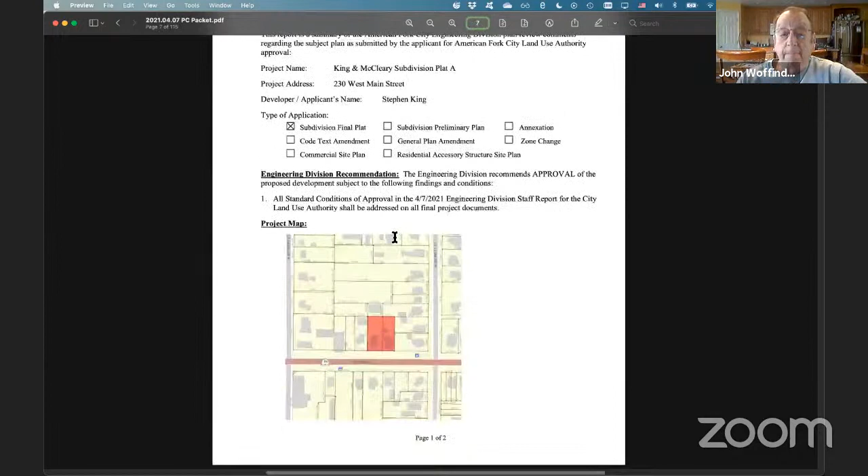Adam, would you lead us in this one, please? Yes, thank you Chairman. This first item is the final plat for King and McCleary. This may look familiar because we did see the site plan a few weeks ago. This is just a subdivision plat which formally divides the properties. Actually, there were two properties to begin with. This basically shifts the lot line to go right down the center of the drive aisle between the two properties and the two structures, so each lot is approximately a quarter acre. While the site plan did indicate there's a shared access, and I believe there's been a document recorded to such effect, just as an extra measure of precaution, I'd recommend a plat note be added that also notices this shared access between the two properties. With that, planning would recommend approval.

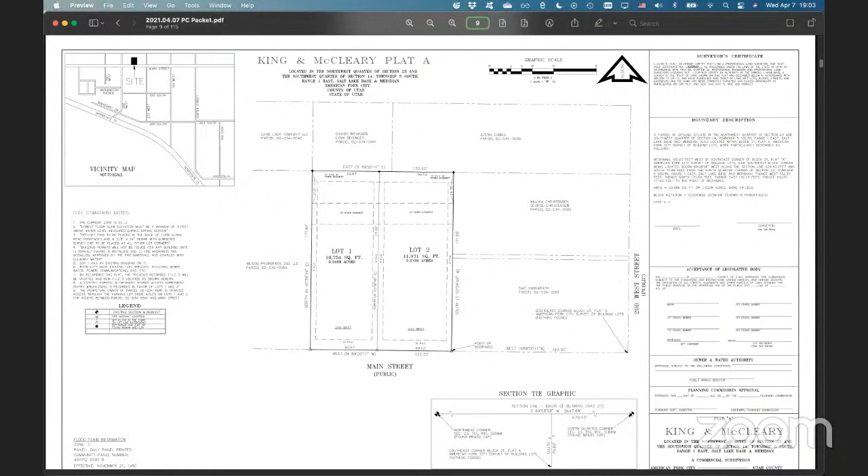Let me double check on that. City standard notes, yes, okay. You're right, Harold, okay so strike that. That is there, so that was something I somehow overlooked, but you're correct, it is there. We talked about that when they brought it before us last time, and I think they pointed that out.

Good catch, Harold. Jeff, does engineering have any concerns with this project? No concerns from engineering, recommend approval. Any questions for engineering from the commissioners?

This does require a public hearing. Have we had any public hearing comments turned in on this one, Adam? Not that I'm aware of, no. All right, so we'll open and close the public hearing since there are no comments to be made.

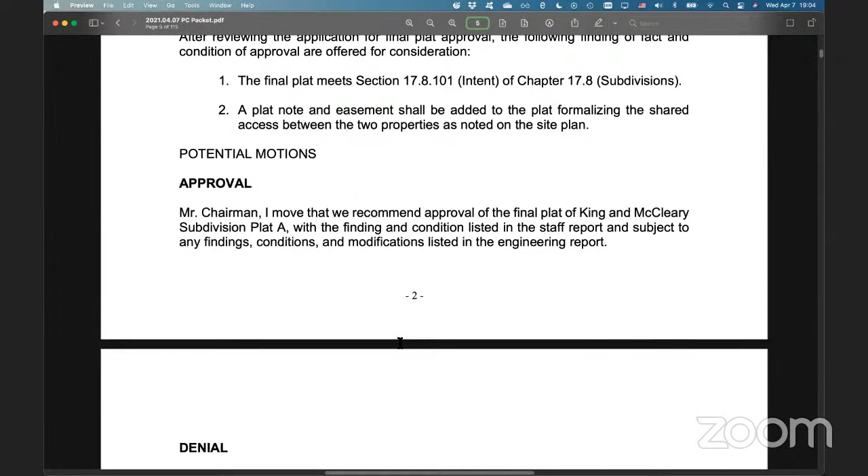I would like to entertain a motion from someone, please. Mr. Chairman, this is Harold. I move that we recommend approval of the final plat of King and McCleary subdivision Plat A with the findings and conditions listed in the staff report, subject to any findings, conditions, and modifications listed in the engineering report. Thank you, we have a motion from Harold, do I have a second? This is Ryan for second. I have a second from Ryan.

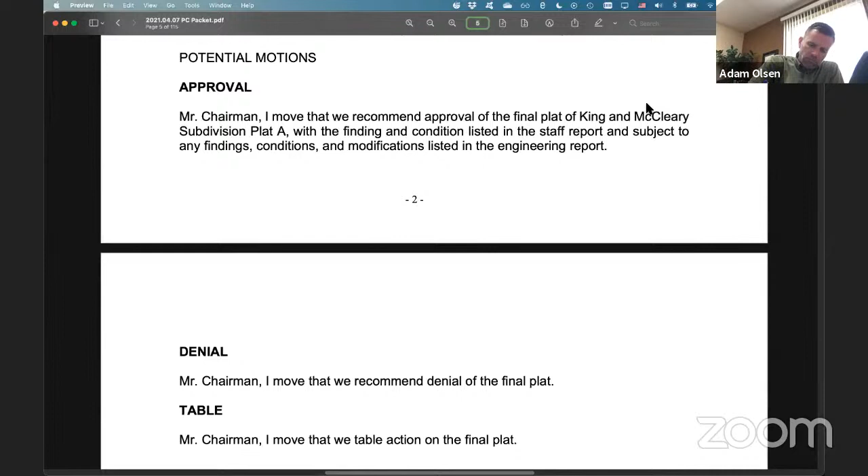Any further comments on this project? If not, we'll take a roll call vote. Christine? Aye. Is Chris here? I don't believe so, no, not yet. Ryan? Aye. Harold? Aye. Jeff? Aye. Chairman votes aye also. So it's 5-0, motion passes.

Moving on. Hearing, review, and action on the preliminary and final plat for Mitchell Farms Plat D, located in the vicinity of 730 North, 860 West, in the R1 12,000 zone.

Adam? Thank you, Chairman, just a quick update. Chris will likely not be joining us, he did send an email earlier. He was going to try to log on, but his service was really spotty, and so he didn't know if it would be successful. So if he's not with us, that's why.

Okay, but I'll go ahead and introduce this next item. This is Mitchell Farms Plat D. This is basically at the southwest corner of the subdivision, at the intersection of 700 North and 900 West, the northeast portion of that intersection. This just kind of fills in that area. The only reason there's a preliminary plat before you is because the original expired, but this is the same as what was approved a few years ago, I believe in 2017. It's just another phase of the subdivision. All the lots exceed the minimum requirements for the zone, and we'd recommend approval.

Any idea when they'll be taking the apple barn and the other buildings down that's on that corner piece of property? I don't know, no. Kind of sad to see them go, but that's progress.

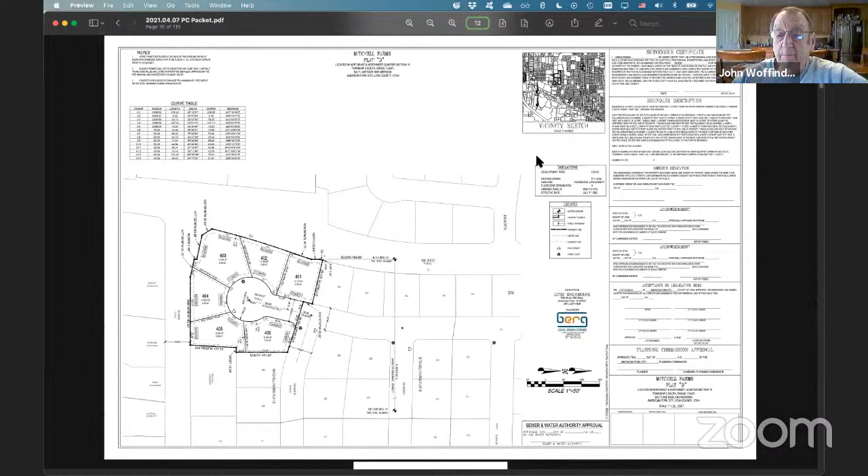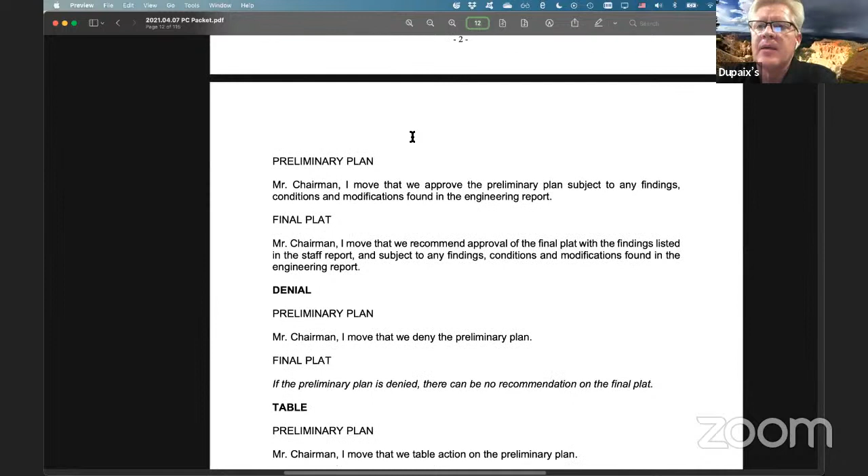Mr. Chairman, this is Jeff. I move that we recommend approval of the final plat with the findings listed in the staff report and subject to any findings, conditions, and modifications found in the engineering report. We have a motion from Jeff. Do I have a second? Second, Harold.

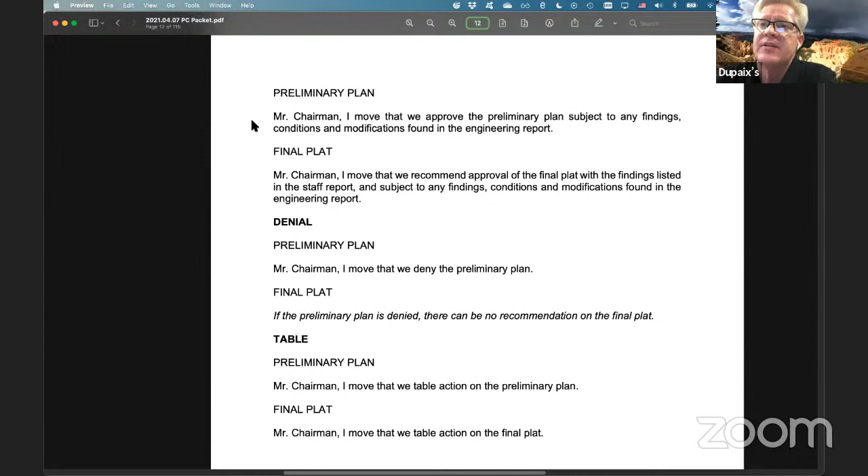Oh, that was the final plat. So actually I need to do the preliminary plan first, right? Preliminary and final both. Okay, so I need to state both motions. For the preliminary plan, Mr. Chairman, I move that we approve the preliminary plan subject to any findings, conditions, and modifications found in the engineering report. Harold, are you still on board for that one?

Second. All right. Do I need to roll call or restate the final plat? Has the vote been made on the preliminary? Not yet, no. It's just been seconded. Once that one is done, yeah.

Okay. Christine, aye. Ryan, aye. Harold, aye. Jeff, aye. Chairman votes aye also, 5-0 on that one.

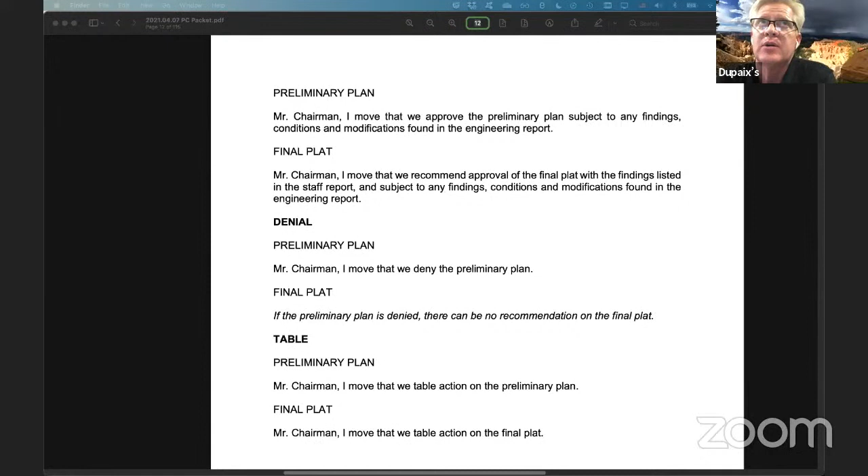All right, now we'll do the final plat. Mr. Chairman, I move that we recommend approval of the final plat with the findings listed in the staff report and subject to any findings, conditions, and modifications found in the engineering report. Thank you, I have a motion from Jeff. Do I have a second? Second, Harold.

Any further comments on the final plat? If not, we'll go with the roll call vote. Christine, aye. Ryan, aye. Harold, aye. Jeff, aye. Chairman votes aye also, it passes again.

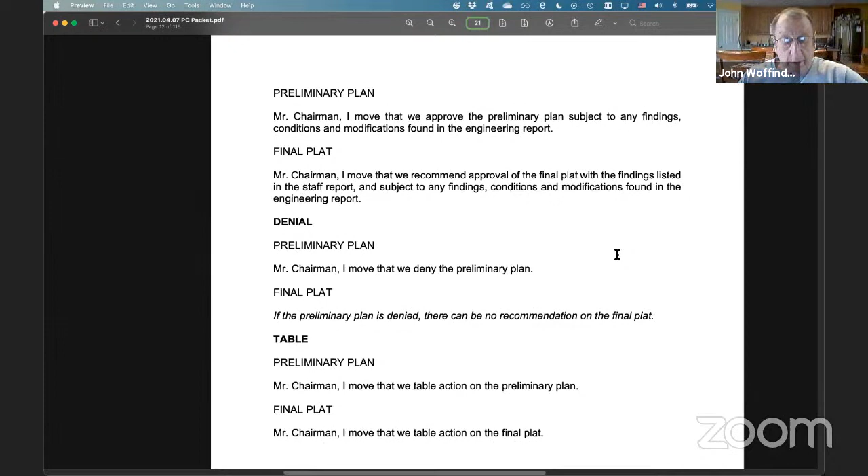5-0. Okay, moving along. Review and action on the final plat for Rockwell Ranch, Block 5, Phase 2, located in the area of 620 South, 1100 West in the TOD zone.

Thank you, Chairman. This is a fairly straightforward item. This is a final plat for Rockwell Ranch, Block 5, Phase 2. What this does is it adds a common area to the overall development. This was inadvertently left out of previous plats, and it's just a cleanup item to formalize that and include it in a plat. So this is intended as open space, common area to be owned and maintained by the overall HOA for Rockwell Ranch.

Basically a housekeeping item, right? Yes. All right, any comments or concerns from planning commissioners on this one for Adam?

All right, this does not require a hearing, so we'll take a roll call vote. Oh, we need a motion first, I guess. Someone need a motion on this one, please.

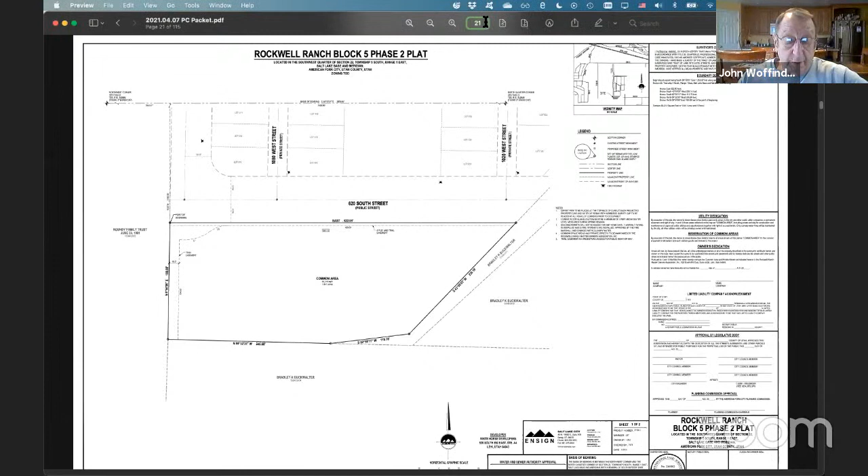I have a question, I guess. If this will kind of be used as water retention, but also as a play area, is that right? It will be, I believe it will be landscaped as open space. I don't know that it will have playground equipment in it, but it's not just going to be left natural, it will be improved.

I'm just wondering if crosswalk painting would be helpful if people from residential areas will be using it much. It's hard to tell the scale, maybe it's not as big as what I'm imagining, but that's just a consideration. What, a crosswalk across 620 South, Christine? Yes. It's nearly 2 acres, so it's about the same size as Martin Park out here behind my home.

I feel like when we have open space that would be used as a gathering or play area, a crosswalk's a good idea just for families and children. That's just a thought.

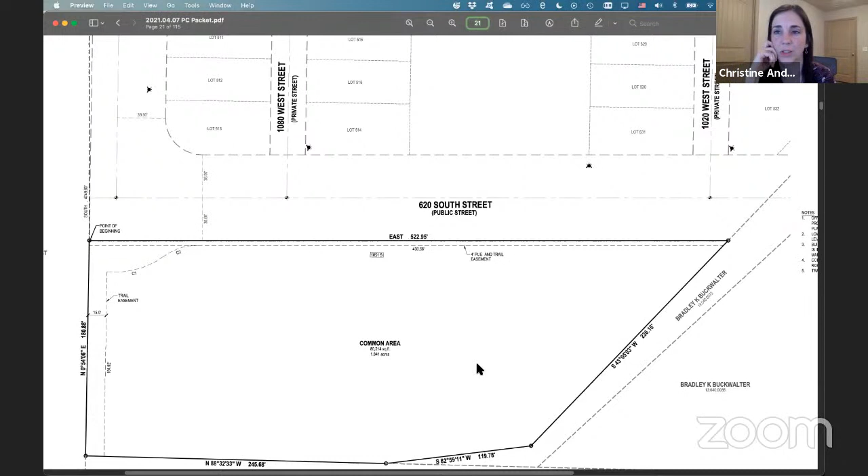Well, I can support that because we have a similar issue with Hunter Park by my house. It's a very popular park, and the crosswalk went in once the park was built, but then we added a rectangular rapid flashing beacon to enhance safety. If we go that direction, which I support, we would need to add that amenity as well, because it brings enough attention that kids or people crossing to go to the park will make drivers slow down.

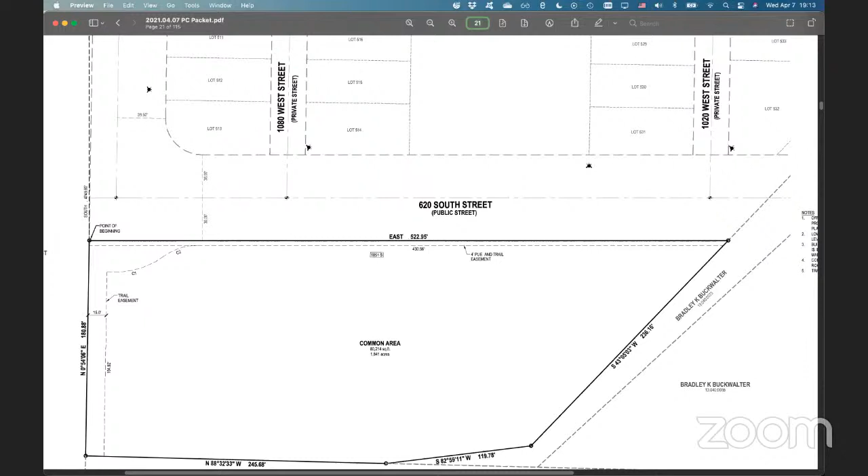This is Tana from engineering. I put up the plans for the development just to the north, and they actually do show a crosswalk going across at 1100 and 620 South. So I would strongly suggest that we put in the RRFB with it.

I know there's a crosswalk at the north end of Martin Park that was painted when they redid 7th North last fall, and it gets used quite a bit by kids coming down to the park. So it's a good idea to have a crosswalk for sure.

Any other comments or concerns?

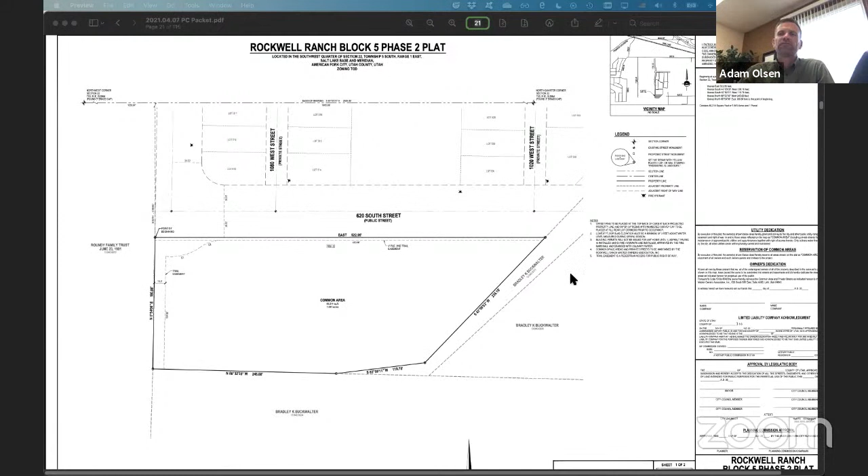Adam, we can't necessarily put that crosswalk in the motion, can we? It's shown on the plans already. It's for improvements. All right, let's have a motion on the Rockwell Ranch Block 5 Phase 2, please, then, from someone.

Do we want to hear—does this require a hearing? No, okay, this is just review and action on this one.

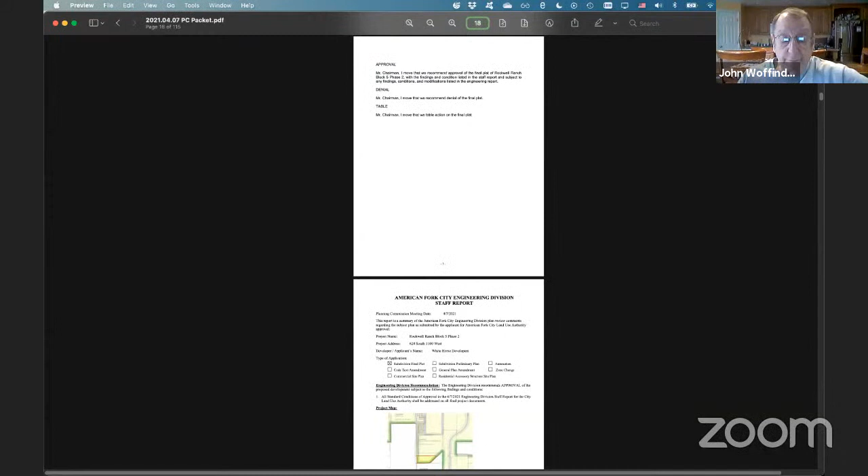I would just like to hear engineering's opinion on putting in a system like that with the crosswalk. We can look at it and see—sorry, this is Rebecca Andrus, city engineer. We can look at it and see if it warrants.

We want to be careful using those in specific areas, because if you have them everywhere, they begin to become white noise. So we want to focus on having them on high intensity crosswalks in areas like schools. I understand that.

At the same time, 620 South is a busy road and will become busier as the rest of that area develops, so I strongly encourage you to take that under consideration. Yes, we can definitely look into that. And like I said, we can see if it warrants it.

Do you think, Jeff, that it'd be as busy as 700 North eventually? Potentially, especially if things get punched through across the North County. There's a lot of traffic at 700 North, but there's no warning signal, just a crosswalk. But it is used quite heavily by the neighborhood to the north of the park. Safety is a big issue, there's no doubt about that.

All right, need a motion on the Rockwell Ranch Block 5 Phase 2, please, from someone. This is Jeff, Mr. Chairman. I move that we recommend approval of the final plat of Rockwell Ranch Block 5 Phase 2 with the findings and conditions listed in the staff report, and subject to any findings, conditions, and modifications listed in the engineering report.

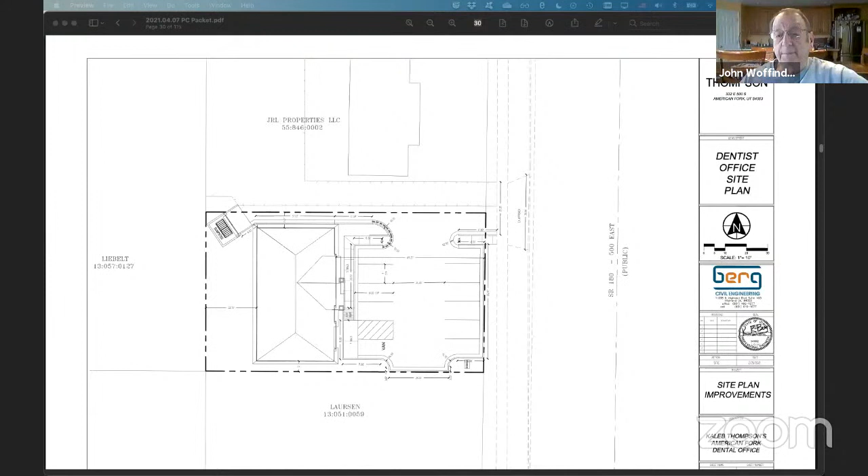Any other comments? Engineering, any concerns on this particular project? No comments or concerns from engineering, and recommends approval. All right, thank you. Any comments or concerns from the commissioners to engineering on this project?

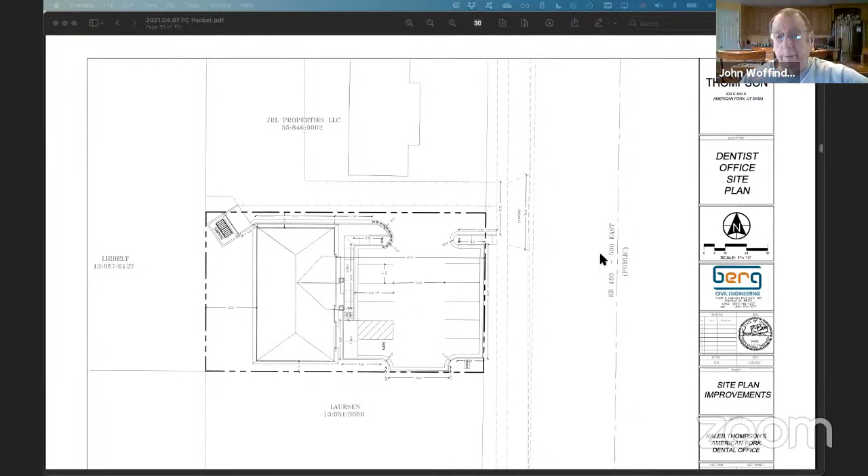Hearing none, this one requires a public hearing. Adam, any public hearing on this one? No, we've not received any comments on this one. All right, we'll go ahead and close the public hearing process then.

Need a motion on this one for KT Dental, please. Mr. Chairman, this is Harold. I move that we recommend approval of the site plan for KT Dental.

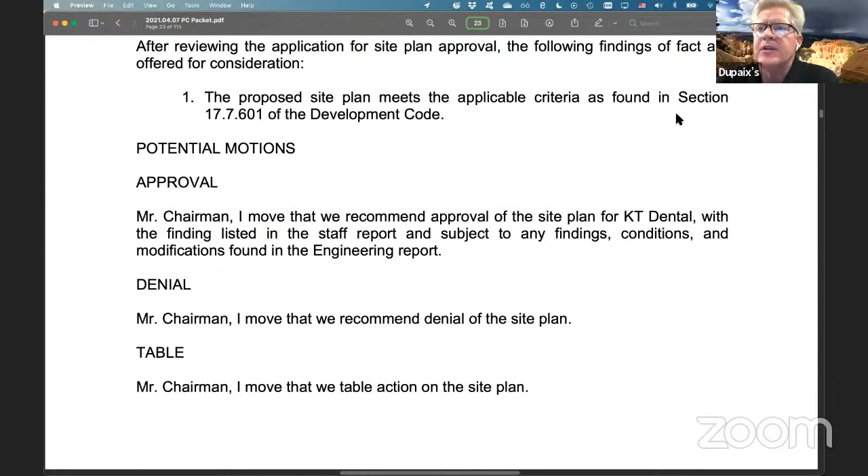Did we lose Harold? Harold, you're muted. Oh sorry, I was trying to move something so I could read the whole approval.

Mr. Chairman, I move that we recommend approval of the site plan for KT Dental with the findings listed in the staff report and subject to any findings, conditions, or modifications found in the engineering report.

All right, thank you. We have a motion from Harold. Do I have a second? Second from Jeff. Any further comments or concerns on this one?

Chairman Woffinden, this is Ken Berg. Oh hello, Mr. Ken, how are you? Fair to Midland, I didn't know you were there. Sorry about that. That's fine, you guys are on a roll.

Before this, we needed you guys to give your recommendation on using the existing 500 East right-of-way that has an oversized planter to meet our parking requirement. I don't know if that's listed in your reports. If it is, that's great. I just didn't want to go to city council without your recommendation on that.

Adam, what's the status on that planter? I didn't have any issue with that, so I didn't bring it up. Do we need to add that to the site plan? I don't believe it needs to be added. If there's any question later, I can address that, but I don't believe so.

Okay, that satisfy you, Ken? Of course, thank you, you're good to work with, young man. We put up with engineers all the time.

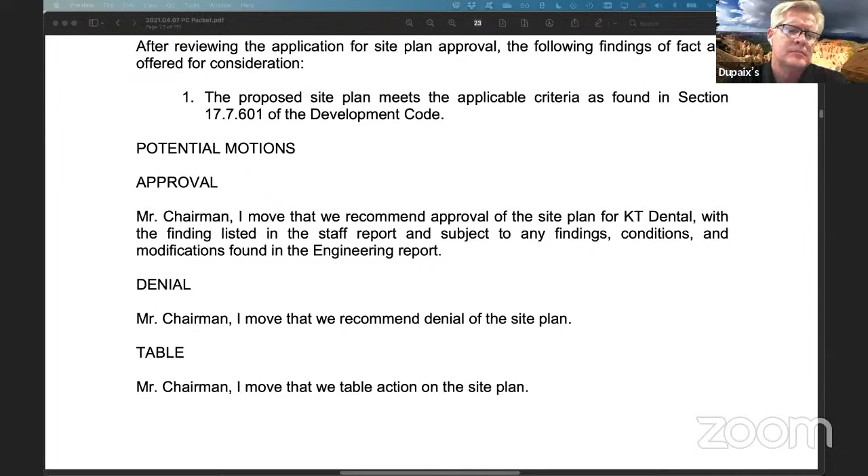Christine, aye. Ryan, aye. Harold, aye. Jeff, aye. Chairman votes aye also. It passes 5-0.

Thank you, sorry for not noticing you, Ken. Next time? No, you're on a roll, I don't ever want to stop when you guys are doing your job. So keep up the good work. You don't want to stick around till 1 o'clock in the morning? It used to be fun. No, I'll leave those for you guys. Yeah, smart man, smart man.

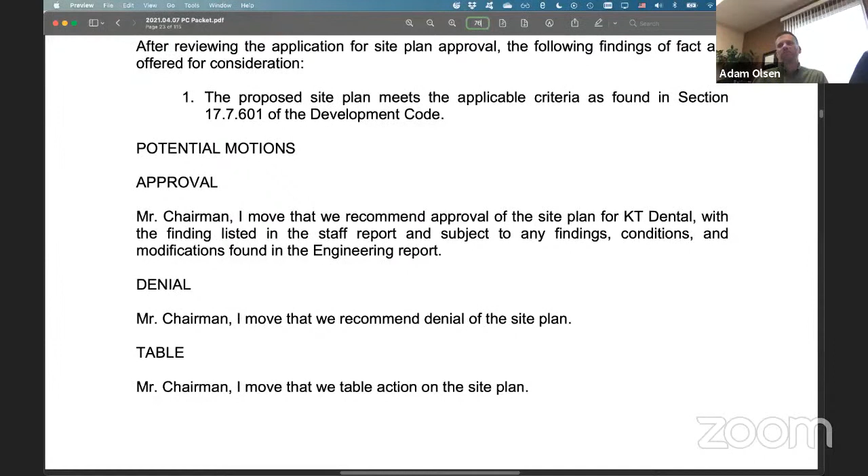And then does this one move on to city council or do we end with you guys? This one goes on to council. Okay, all right, thank you much. Thank you, Ken, bye.

Okay, these next two we'll discuss together. We'll hold separate hearings and separate motions and separate votes. Number 5, hearing, review, and action on the land use map amendment located at 717 West Main Street from the major transportation facility to the design commercial designation. We'll go ahead and discuss the land use map first, then we'll go into the zone map amendment second.

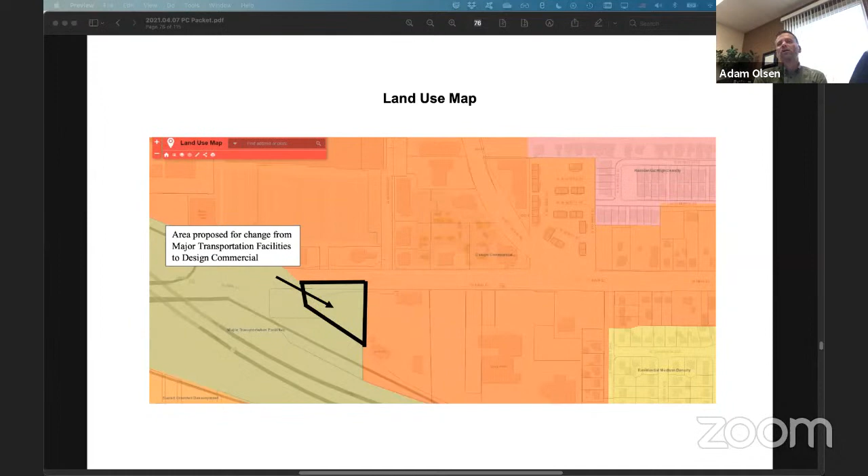Adam: Thank you, Mr. Chairman. As you stated, these can be discussed together. There are 2 motions in your report. So just a little bit of background: when UDOT came through and rebuilt or expanded I-15 a number of years ago, as well as Pioneer Crossing, this was part of the old Harts property, I believe, and it was obtained for that expansion purpose.

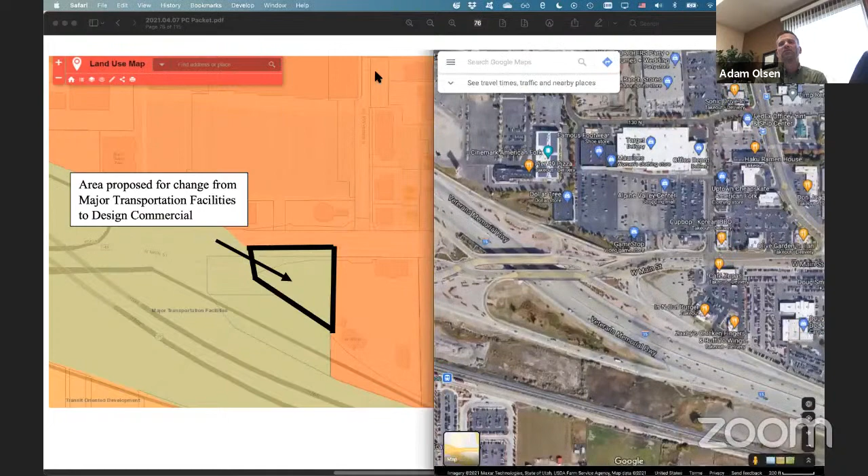It's no longer needed. The adjacent developer is purchasing that and would like to construct a site plan on this. But in order to do so, the underlying land use classification and zone map needed to be amended from transportation facilities to design commercial and then the SC1 zone as well. You can see on the aerial being pulled up, it's basically just west of the Zupas and In-N-Out area, the leftover unimproved portion. This will be finished out.

As part of the site plan we're actually reviewing in anticipation of this zone change, it does reroute quite extensively the In-N-Out drive-through. I know that was of concern at the last meeting, and so that is being addressed with the site plan being reviewed for this area. So with that, staff would recommend approval of both the land use and the zone map amendment.

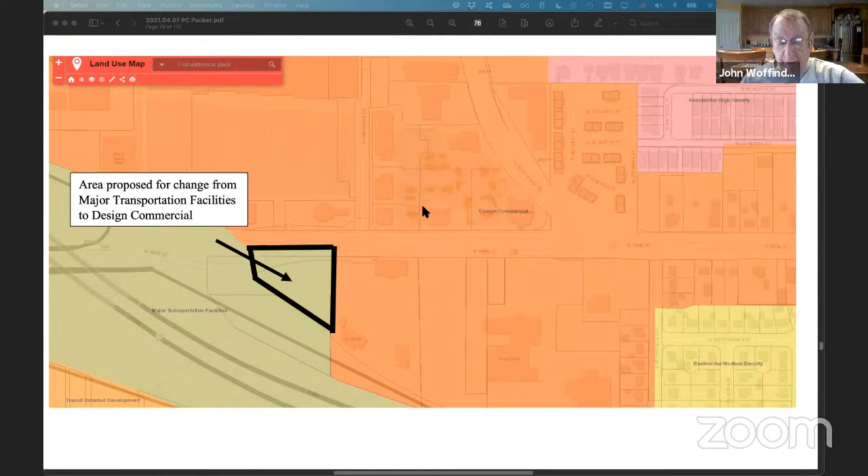All right, thank you. Engineer, any comments on this project? No comments from engineering. All right, thank you. Have we had any public comments on either the land use or the zone map amendments, Adam? No. All right, we'll go ahead and open those 2 hearings. We'll go ahead and close those 2 hearings, no comments received. We need a motion first on the land use map amendment, please, from someone.

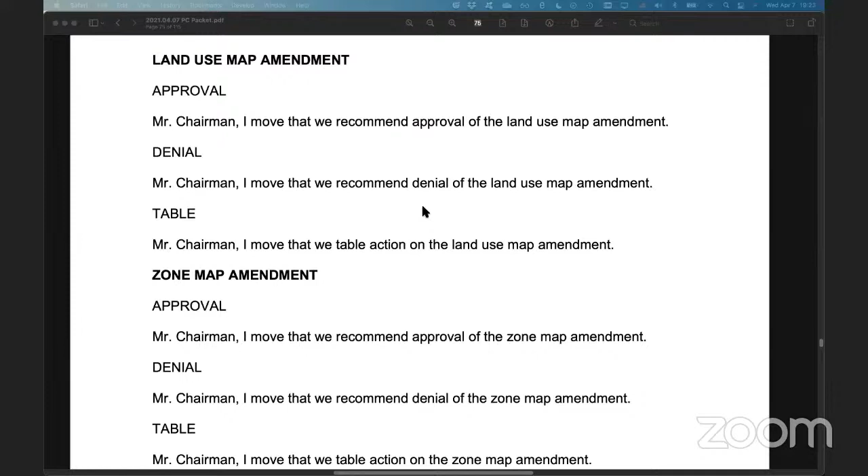Chair, this is Ryan. I move that we recommend approval of the land use map amendment. All right, I have a motion from Ryan. Do I have a second? Jeff, second. Have a second from Jeff. All right, thank you.

Christine, voting on this one please. Aye. Ryan, aye. Harold, aye. Jeff, aye. Chairman votes aye also. It passes 5-0. Okay, now we need a motion on the zone map amendment, please, from someone.

Mr. Chair, this is Ryan again. I move that we recommend approval of the zone map amendment. All right, I have a motion from Ryan. Do I have a second? Second, Jeff. All right, thank you.

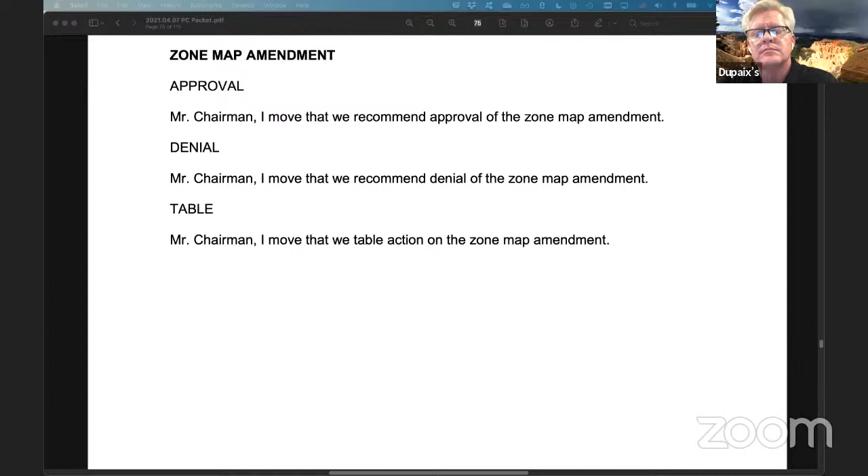Christine, voting on this one please. Aye. Ryan, aye. Harold, aye. Jeff, aye. Chairman votes aye also. It passes 5-0.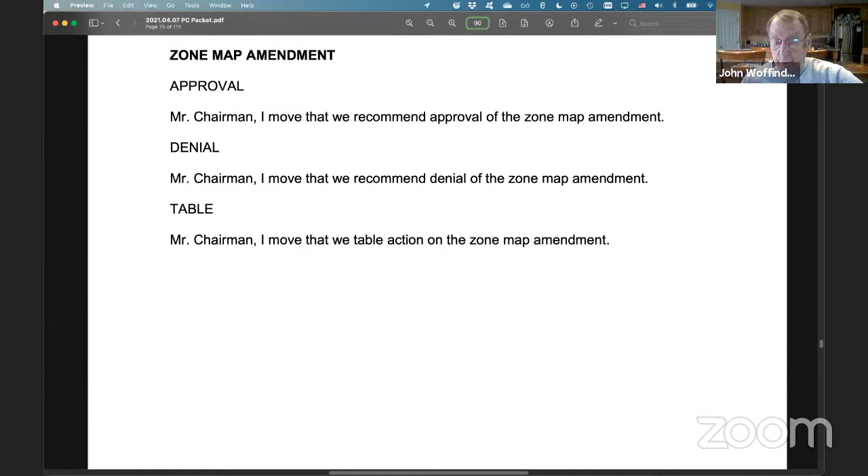Okay, we're down to number 7: hearing, review, and action on an amendment to the Lake City Row Planned Community Master Plan, located in the vicinity of 860 East Utah Valley Drive, in the PC Planned Community and the PI1 Planned Industrial zones.

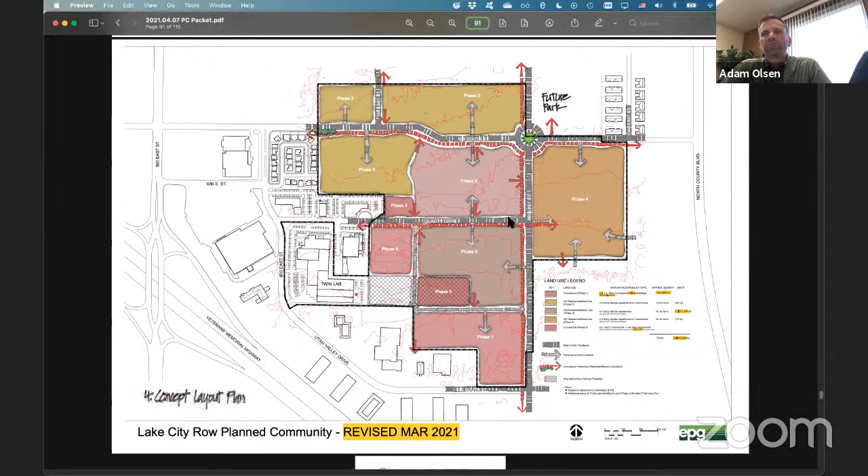Thank you, Chairman. This area was annexed under the Vest annexation, most of it in 2019, and the majority of the property was zoned PC, or Planned Community. This was done in anticipation of mixed use development consisting of office space, retail, and higher density residential. In addition to the annexation, a master plan was approved for the area in November of that same year, 2019.

The master plan itself, which is what's before you on the screen, envisioned up to a potential of 2,500 residential units. Within those residential units there were also areas of commercial, such as office and retail, amongst the higher density. Also with the master plan, the applicants were granted a reduced parking ratio of 1.8 stalls per unit.

This was done under the premise that a large area of shared parking would be present between the office commercial and the high density residential, to offset the peak demands of residential and office use.

You can see this area called out as a crosshatched area on the plan, at the southwest corner of phase 3 and north of phase 1. It's labeled as phase 5, with a general crosshatched area to the west. So the applicants have come with a proposed change to this master plan.

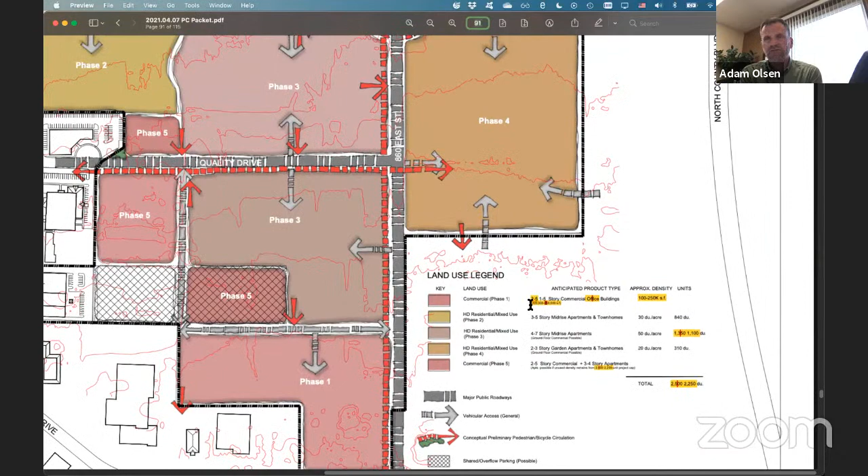The change alters the commercial in phase 1 by removing the office designation and also removing the 2 to 5 story designation from the anticipated product type. In its place, what they propose is a 1 to 5 story, general commercial building type, intended for office warehouse.

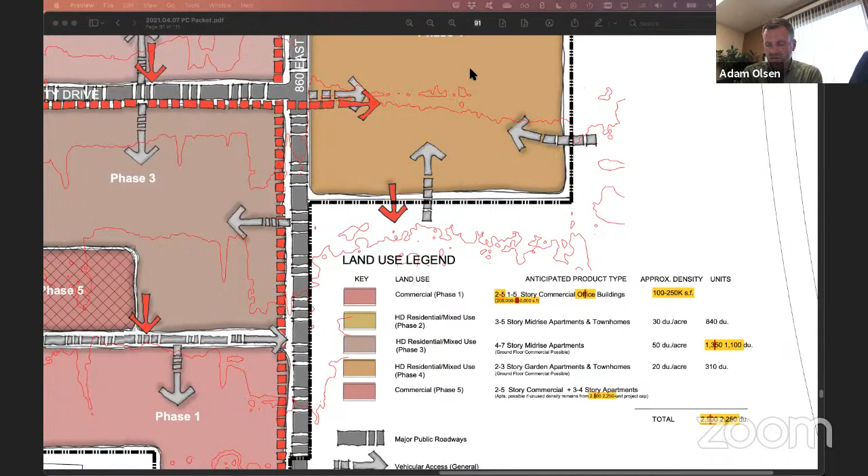Planning staff recommends against the proposed change. The original master plan, as approved, provided up to 2,500 residential units on the premise that this would be a true mixed use development.

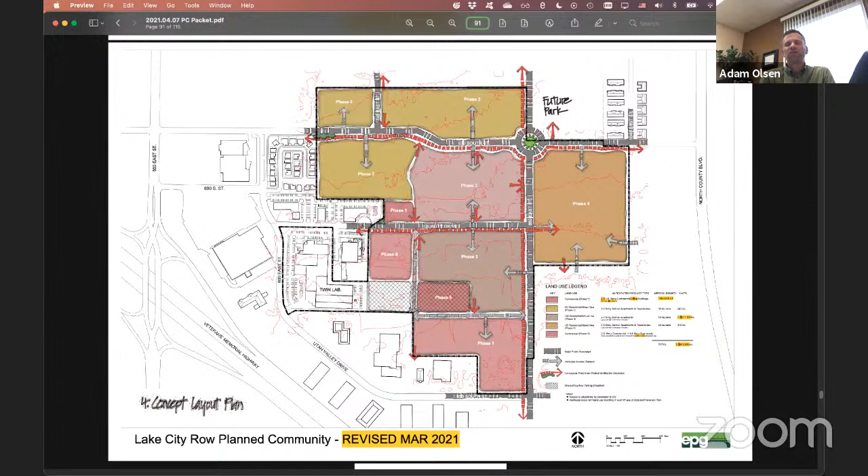Office warehouse developments are typically found in largely industrial or light industrial areas, not within traditional higher density mixed use commercial developments. The office component of a mixed use development, along with more traditional retail, helps create that mixed use environment which is conducive for walkability, and allows residents to conveniently access both workspaces and more traditional retail uses.

Additionally, as I stated, the parking requirements for this area were reduced from the city standard of 2.25 stalls per unit down to 1.8.

This was done on the premise that there would be approximately 1,500 commercial or office spaces used for this shared parking, coming out of phase 1, which is what they're looking to change tonight. Office warehouse uses have a greatly reduced parking requirement, with the warehouse portions only requiring 1 space per 1,000 square feet.

So while the applicant does propose, in their written narrative, a reduction of the overall residential units by about 250 units, the area where this reduction would occur is in phase 3, north of, I believe, Quality Drive.

Phase 3, adjacent to phase 1 and adjacent to the shared parking space, has already been approved for over 500 residential units at that reduced space. If office warehouse uses go into phase 1, it will further reduce the amount of shared parking available for those 2 uses, which was one of the premises of the reduced parking standard granted with the original master plan.

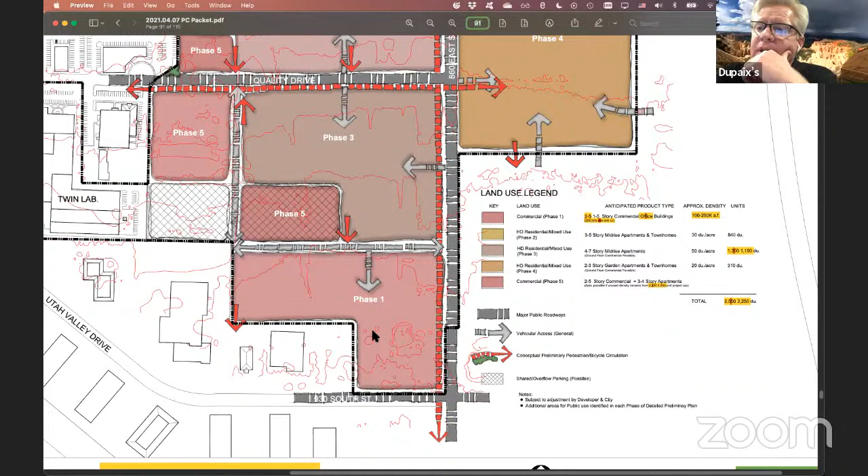So my question to you, Adam, is you have what's currently labeled Twin Lab, which is Built Bar, and then you've got Thermal Works down there in the same area. How are those classified? Their uses are somewhat industrial. Yes, but those are pre-existing, and when a lot of this area annexed, it was annexed under the premise that this would be converted into more of a mixed use, true mixed use development with more traditional retail office components, and then the higher density residential mixed in as well.

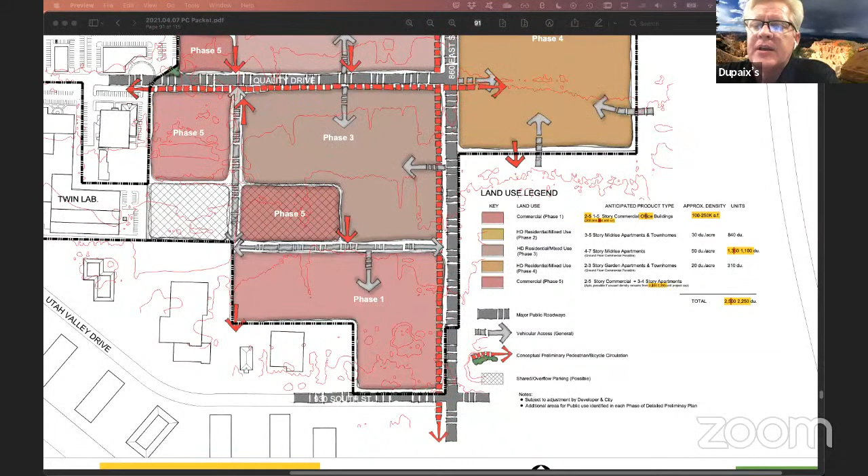So phase 3, that was approved a few months ago, I believe it's the Ritchie project, and it was a little over 500 units approved in that phase. But again, when the original master plan went before the council, the crosshatched area was intended for a shared parking area between the office use and the residential use, with those peaks being offset. I'm just trying to understand, trying to look at where staff is and trying to think of where the developer could be, because looking at the other uses, I can understand why they may want to go that direction.

Yeah, and I have to agree with Adam. I think we shouldn't be changing the master plan, because putting office warehouses in here kind of defeats the idea of a mixed use, and it shoots the walkability down for those residents who would want to walk around and go from store to office or whatever it may be, because they're not going to want to go to an office warehouse. And with an office warehouse, you're going to have a lot of truck traffic coming and going. It's going to be awful noisy for people living there if they put office warehouses in. So I agree wholeheartedly with Adam that I don't think this amendment should go through and change the master plan.

Anybody else have any concerns? I have a comment. I remember recommending approval for this area, and I'm pretty excited about it. It's a great chance for a true mixed use, like Adam was saying, and I really feel it's important to keep it the way we originally approved it.

We allowed them to have a higher density with the understanding that there would be that shared parking, and that it would be mixed use. The higher density was also given with the understanding that the extra parking needed from the higher density would be covered by phase 5. For a true mixed use development to work, it really needs that office commercial use to allow for walkability and local livability, workability, all those things that make a mixed use area work. So if you turn this into office warehouse, not only do you have the truck traffic and the noise and the undesirableness of living next to a warehouse, we'd be allowing the higher density without the amenities of a mixed use area.

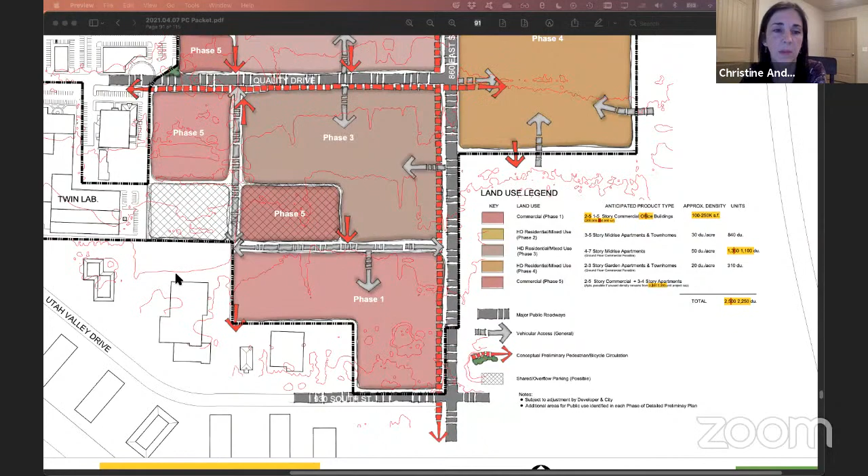So I feel like it's really important that it stays a true mixed use area, even if it means postponing some of the development until the market is ready for it.

I agree. Mr. Chairman, if it's possible, I would like a chance to respond to the concerns before the commission deliberates, because that might help the deliberation. Well, I was going to bring you in, but now that you're here, go ahead and we'll give you a couple of minutes to tell us about your project and why you think it's necessary to go against the master plan that we've already approved.

Okay, you've got it. And I just want to start by showing appreciation. State your name for the record, please. Yes, my name is Buck Swaney. I'm with Millennial Development Partners, or MDP Land, and we're the proponent of the master plan.

Thank you. I do want to keep this discussion simple and direct. An important thing to note is that we've been delivering less residential density, and this adjustment that we're requesting would also deliver less commercial intensity.

The LCR Lake City Row plan progress, we have a history of delivery. We've delivered $3 million of right-of-way, about $6 million of roads and utilities that are nearing completion right now. The utilities are paid for and sized for 2,500 units.

We maintain a good faith obligation to the city and our partners to roll with commercial development because it's part of our core commitments. Now, as COVID happened, we experienced pretty unbelievable disruption to office economics, like nothing that the American economy has really ever seen before.

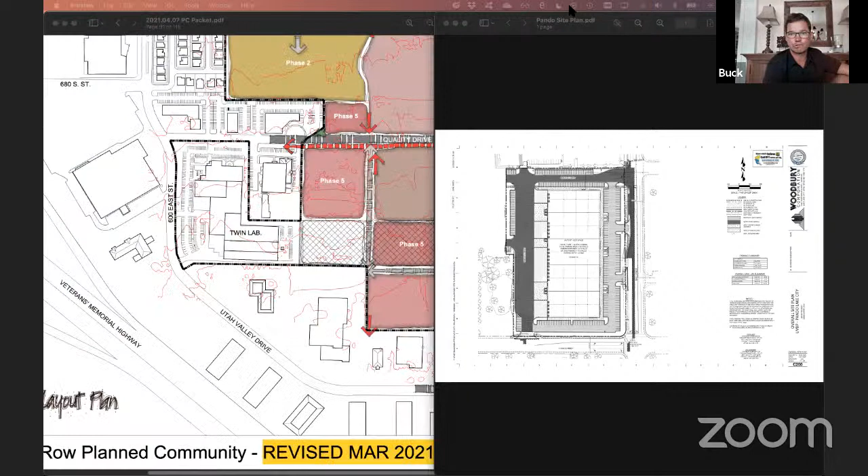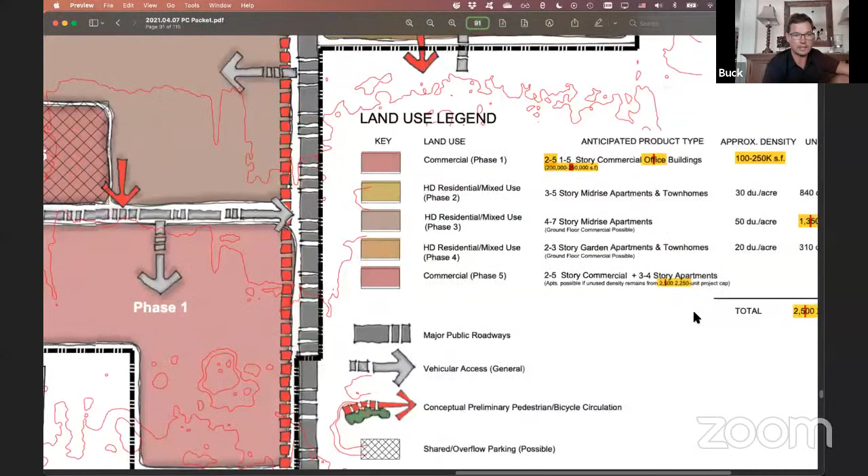The first is that in the master plan — Vendeline, if you could go back to the phasing sheet of the master plan. There you go. If you look over in the key at the right, you'll see the third color down has the high density phase 3 stuff. I think that's not the phasing plan — that's the concept plan, correct? There we go, all right.

You see that in phase 3, it shows maximum density, 120 dwelling units per acre. If you zoom out a little so we can see the Aspen Meadows property where this phase 3 is, the non-hatched phase 3, that's the area where we had targeted up to 120 dwelling units per acre of density. But on the next sheet, we saw a more likely outcome of 50 dwelling units per acre. We actually landed at 34 dwelling units per acre on this 15-acre part of the site.

So the parking need is much less dramatic — it's a much smaller take on parking. Instead of the intended 754 units we allocated based on 50 dwelling units per acre, the site's final design only contained 512 units. Our proposed 250 unit reduction actually comes from this area — it was drawn from this area, not the phase 3 area to the north. So the practicalities of developing this site packed much less demand for parking right around the phase 5 area, and so we want to take 250 off of this site now.

We also think we're going to take significantly more off of the balance of phase 3 when it comes to be built. So we expect to continue making additional density reductions as the economics become clearer. One thing that's become clearer is that it's easier or more reasonable for developers right now to build some product that's less dense than they initially indicated. So instead of needing 1,358 stalls, this Aspen Meadow project, the first phase of phase 3, only needed 922 stalls — a reduction of 450 stalls right in and around this shared parking amenity.

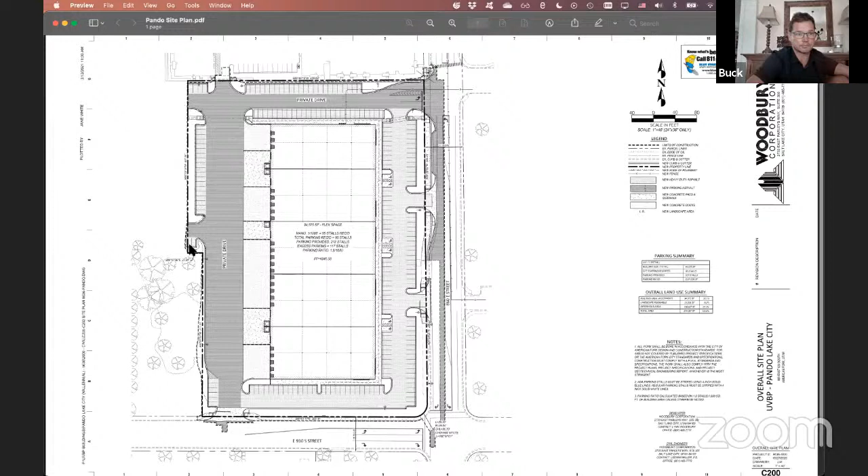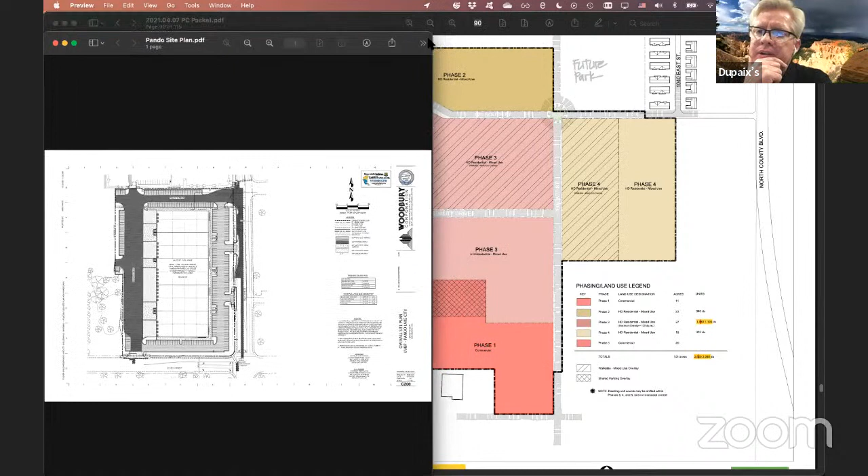So your intent would be, should this move forward, your intent would be to have the trucks not going north, because I would hate to see those trucks trying to navigate that roundabout depending on their size, that you show in your other plan. So the intent would be to push them back down to 930 and bring them back up Utah Valley Drive over to 500 East, or go down to Sam White Lane and come across. Yeah, that would be by design. That would be the easiest and most efficient thing.

It would certainly be easy enough for us to do things with the site to ensure that outcome is kind of the mode, right? One more thing that I neglected to say is that the access point from the Ritchie Apartments to the north, the Aspen Meadows Apartments, there's a small driveway you can see kind of at the upper left-hand corner of the site plan. The Ritchie Group is amenable to closing that driveway so that the two kinds of traffic don't interfere, if that's what the city, the staff, the planning commission want.

Cars that park down here, as a shared parking amenity, would not likely be resident cars. They wouldn't be allowed to park here overnight. These cars would be visitor cars, so being able to just walk into the site from the shared parking banks here would work. We can also structurally solve the interference of the two different kinds of traffic by closing that access point off, which the owner of the property to the north is amenable to.

Any other questions or comments for the applicant, please? I feel like this office warehouse is beautiful and would work really well in an industrial area. I don't feel that it fits a residential area.

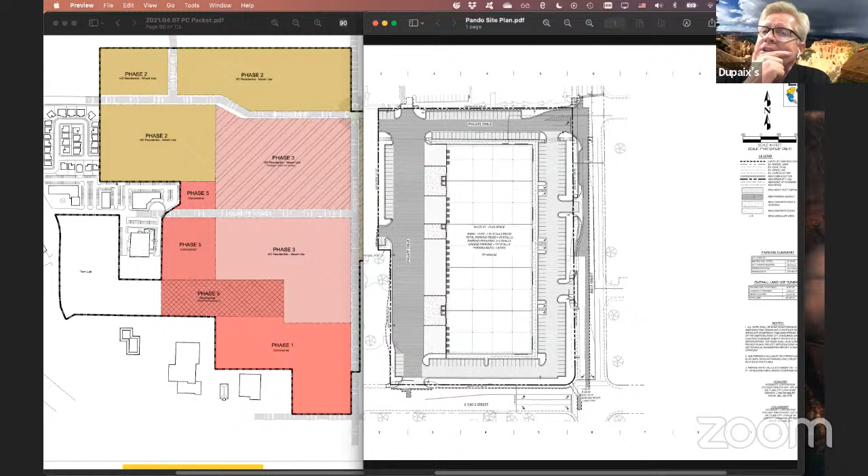We're not talking a lot of shops or anything of that nature if it was originally planned to be office. Yeah, in this area, no shops, no retail was intended to be part of the mix. This was a horizontal piece of the mixed use development, so kind of office over here, residential over there. And the integrated mixed use is over there in the phase 4 area.

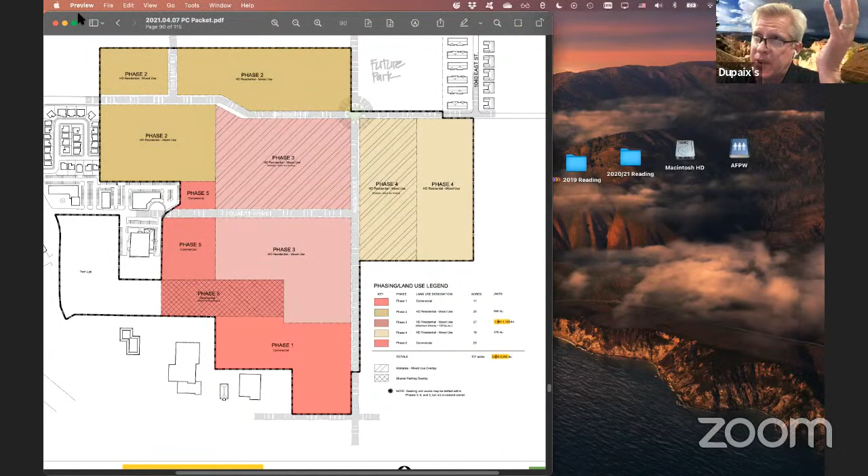Yeah, so as you know, Christine, you bring up a really good point looking at how this fits within the greater area. I think we do have to take into consideration what is there to the south and west, which is definitely more office and light industrial. Plus, as I've driven through some of the mixed use developments that we've got further north, where we do have shops, I haven't seen a whole lot of, and I get it, a lot of it is because of COVID.

I haven't seen a lot of businesses in those areas that we've already planned. So I just look at this area as far as shopping or doing those types of things that kind of keep people close by. The city really doesn't have a whole lot in this area to begin with outside of being on the edges. If any of these people are going to go shopping, they're going to be going up to State Street and going to other parts because that type of business isn't in here.

So I think that was kind of the premise of this mixed use adjacent to what used to be known as Vintaro - by granting these higher densities, it would allow more of those traditional retail uses to be located here. So these people wouldn't have to drive to other areas of the city, that it would kind of pull those into this area. And I know that's kind of how it was sold to the council.

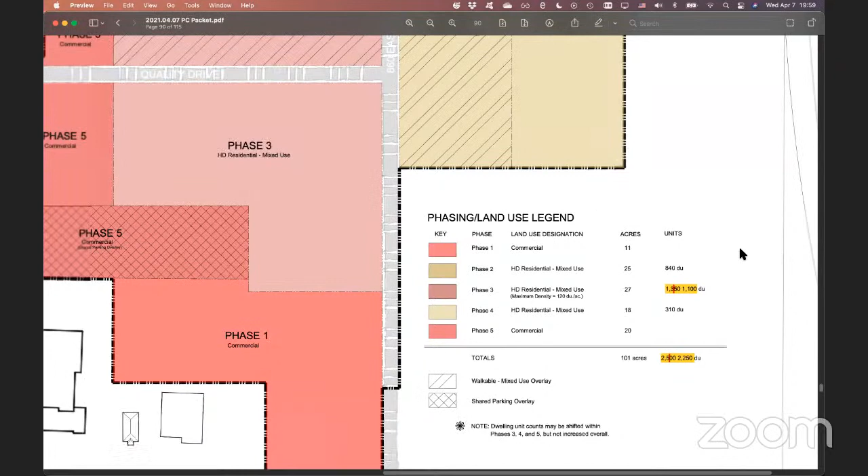I'm struggling to fully understand the situation with regard to where we're at in regards to phase 3. Adam, I was appreciating your comment because that's where I was at, trying to understand what has been approved. I think the original map and parking requirements could have been 1,350 units or parking stalls, but it sounds like now we're going to be significantly less than that based on what's been approved. I can appreciate that the market has totally changed.

Who knows how long that lasts, but I'm also curious where the other drawing came up with regard to the office warehouse proposal. Where is that going to fit in this master plan? That very south corner of phase 1. So what's going in the left side, northwest side of phase 1? That's going to continue for the time being to stay agricultural. There are no concrete plans yet, but we'd be designing all utilities and access to continue the approved land use into that area too.

Where you see the crosshatching for the shared parking amenity just above it, we would orient the building to maximize the size and quality of that bank of shared parking. Okay.

Is there some sort of road planned through that phase 3 crosshatch parking? Yeah, through the very far left side of phase 3, the already approved part from Quality Drive down, there's a driveway access that goes straight down to the crosshatch area. That was part of the site design consideration when Aspen Meadows did their project — we gained approvals on the basis of creating a shared parking amenity, so we needed access to the different projects into that shared amenity. There are significant high quality accesses into and through this area.

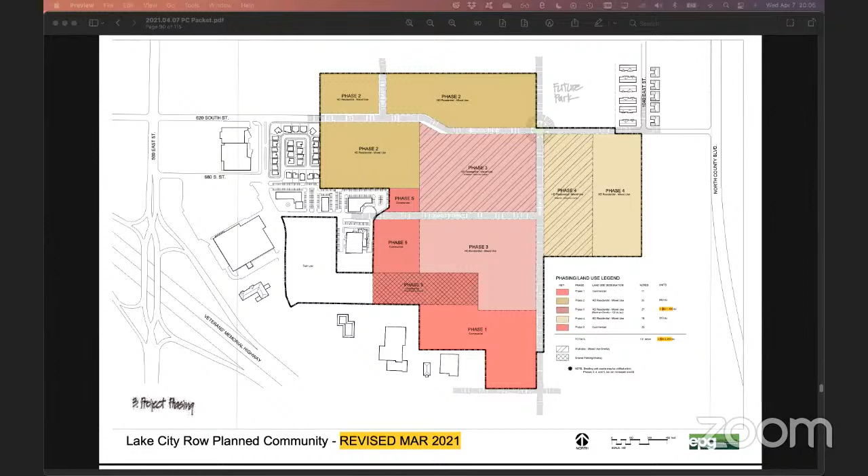And then confirming this wouldn't—to Christine, I think, is really a big proponent, I am as well. If we're going to have this high density type living, then we need to have those shops. One of my favorite places is the All About Bakery that's over there, frankly, and that's a great type of product for those areas. I just think, but in my mind, this phase 1 project was not going to facilitate that type of environment for these residents anyway.

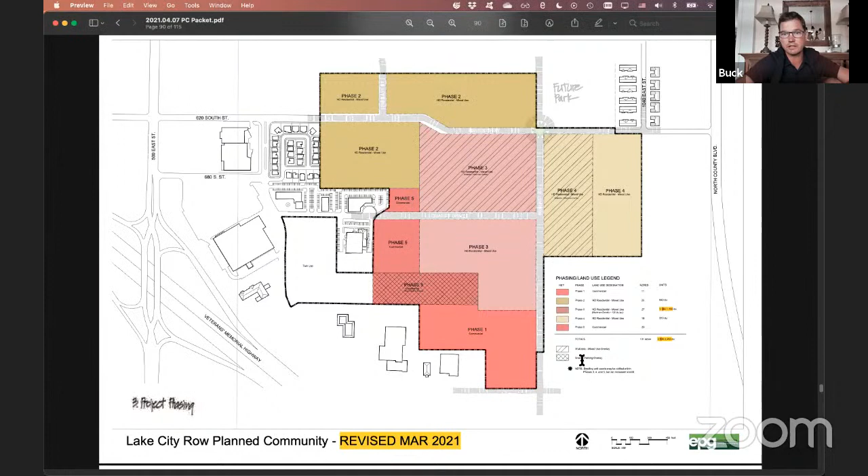Correct, that's where I was, it was always intended as office for phase one. You can see kind of my point on the map there, on phase 3 and 4 there's a kind of cross hatching, and that indicated these were kind of the areas we saw as the potential areas to do the vertical type of mixed use with the retail component. As the couple of years have passed since we first met on this, that action has moved over to the phase 4 area.

Yes, which again, economically, one of the first things that happened is we ran a market study as soon as we had our approval, and the economic consultant said, wow, this thing is going to be really good for retail. We're not talking about Target style retail, but grocery, small grocery retail, village kind of scale stuff, restaurants and things like that. So all of the discussion with investors since then, which has been uniformly positive, is that when we get enough of this other residential done, that's how they and we want to address phase 4.

Okay, any other comments or concerns on this one for the applicant?

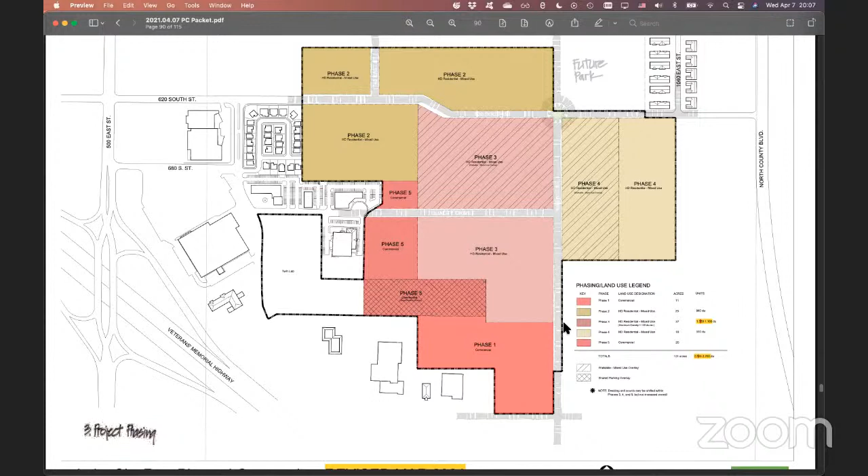Just a comment, thank you for the discussion. Yes, this has been very informative, and you know there's some hard decisions, but it's been stated very well. Things have been very well stated. So I think we've had a really good discussion about this. No, I agree, thank you, Jeff.

Mr. Chairman, I just have one more question for Mr. Buck, sorry. Is it Buck? Buck is my first name. First name, okay, I just see the... okay.

Could you just tell me again what is phase 5? Is that what you were saying, what do you have planned for phase 5? So phase 5 has been just left in commercial. Phase 5, as I look at the project, this is actually a couple of parcels. One of the top phase 5 is where the doghouse is. We don't own the doghouse, we've been trying to buy it for a couple of years.

And the lower phase 5 is actually the Hadco property. I think they have a site plan coming your way, but we were never able to assemble those two properties in phase 5. So I wouldn't see us being likely involved in their planning unless we could ultimately acquire the doghouse.

What we wanted to do was draw them in here as a possibility, because if we had density left over at the end of the project, one of the little keynotes at the bottom says that we could push density around to phases 3, 4, and 5 if it was left over. We thought perhaps we could get a little mixed use on that upper phase 5 parcel, with a few apartments above and some small, kind of coffee shop style retail down below.

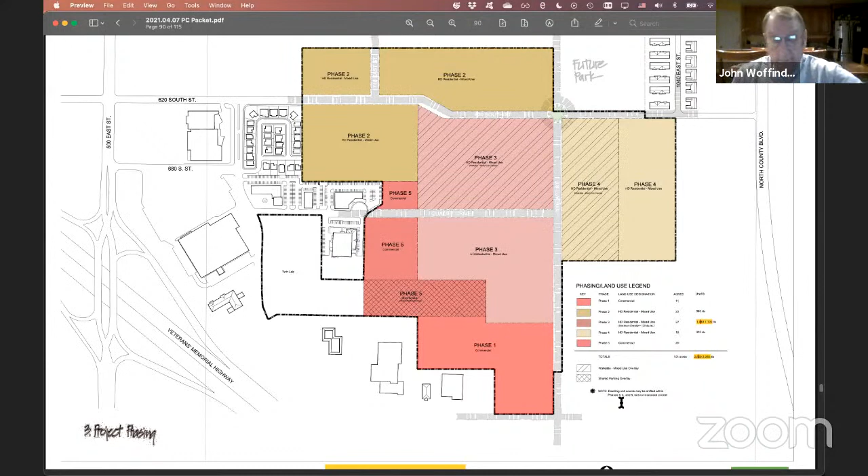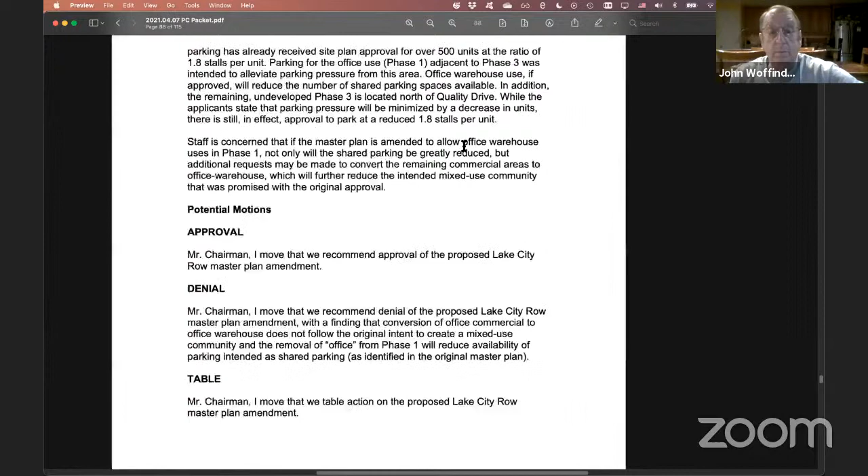There are so many things I like about this project. I just feel that some of the uses are industrial. Mr. Chairman, I move that we recommend denial of the proposed Lake City Row master plan amendment, with the finding that conversion of office commercial to office warehouse does not follow the original intent to create a mixed use community, and the removal of office from phase 1 will reduce availability of parking intended as shared parking as identified in the original master plan.

All right, we have a motion for denial from Christine. Do I have a second? Anybody want to second the motion?

Mr. Chair, this is Ryan. I probably would be more in favor of tabling this to better understand it for me. So I'll just throw that out there, that's probably where I sit.

All right, Christine, do you want to change your motion to table in that respect? We do have a lot of loose ends that we haven't fully discussed, I think, but it probably wouldn't hurt to go through it in more detail and get some more actual drawings and so forth. But it's up to you, I can't make the motion.

Adam, if there's no second, the motion would die, and then you could open it up for another motion. Okay, apparently there's no second for the denial. We'll open it for another motion. So another motion, please.

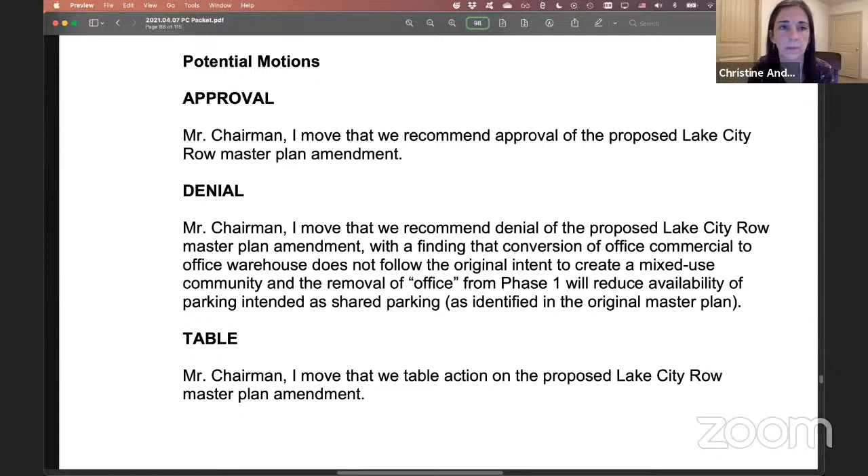Good point. I think if you were to bring some architectural drawings of what your office warehouse will look like, and maybe even address the walkability issue too - is it going to interfere with walkability around the project by putting office warehouses in, and how trucks would interact with the area, the noise of the trucks, the loading docks and all that. Good point. Thank you so much for coming.

Mr. Chairman, if I could, would you like this on the next Planning Commission agenda? That would be April 21st. That agenda goes out, I believe, tomorrow. If the applicant can get that information to us, we could probably put this on the next agenda, or if the applicant needs more time, we can look into May, but I just wanted to ask that to you.

All right, Buck, it's up to you. Can you get the information into Adam by tomorrow? Well, it's not that the information has to be in tomorrow, it's just the reports would go out next week. But I just wondered if you as a planning commission wanted to see this at your next meeting, because if you do, we can put it on the agenda.

Well, I think if we get on the agenda, it wouldn't slow down the development at all. Let's see if we can make it work. That's my opinion, what's the rest of you think? I personally like the idea of trying to keep the ball rolling to benefit the developer. I don't like the idea of stalling unless he needs more time and doesn't feel like he could get information to us by next week to be submitted in our packet.

I do not need more time. I can accommodate. This works great for me and I appreciate the accommodation. Okay, we'll make sure that's on the agenda that goes out. All right, everybody's happy, let's make it happen. Before you cut me off, let me make sure I have my bullets.

I'm going to map the parking changes for you. I'm going to address some of the walkability questions. And then I'm going to address, I think the other thing was truck traffic.

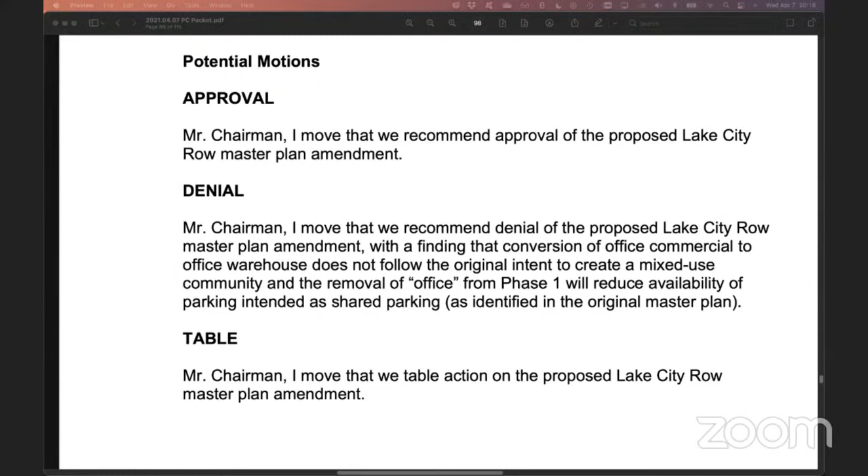Let me just add as well, just understanding the materials that you intend to use. A lot of this hinges on whether this is going to appear like an office product on the facade, on the north face of this, or I guess on the horizontal one it would be on the north face, but likely similar to the other one on the east face. Understanding what your intent to build that is.

Is that a tilt building? Is that a stick frame, or is that a metal frame? I don't know what that's made out of. Pre-engineered metal building. There's a litany of differences between those finishes that would help me understand how that's going to appear if I live across the street from this. Yes, sir, thank you.

All right, we've all got our marching orders. Let's make it happen. Thank you, everybody. Thank you for your time, everybody. Thank you, Buck.

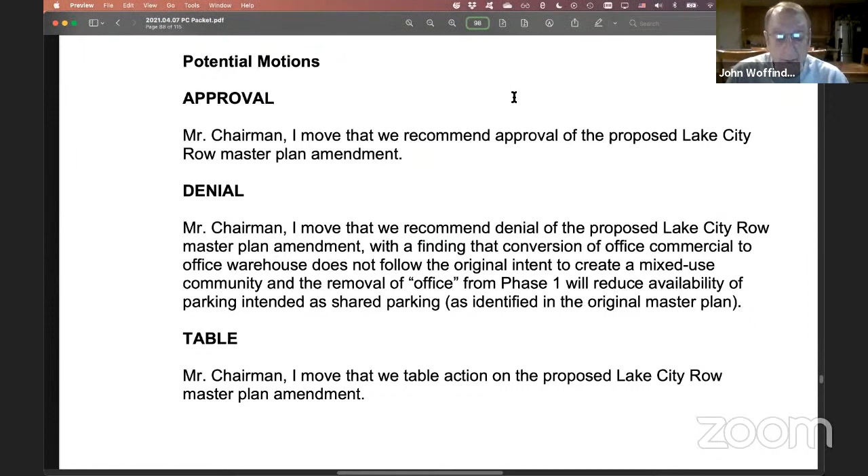Moving on, hearing, review, and action on amendments to section 17.4.401 entitled CC1 Central Commercial Zone of the American Fork City Municipal Code regarding the variability of road cross sections. Adam, would you lead us in this one, please?

I might turn this over to Rebecca in engineering to kind of lead out, but we did get an email from the applicant that basically stated he wasn't really interested in pursuing this any further because of the staff's recommendation that is before you tonight, which is a recommendation against making those changes. But for more particulars, I can turn that over to Rebecca.

Is she still here? I'm still here. You're still here. All right, go ahead. I'm still here. So, yeah, so as stated in the report...

This request was essentially to reduce the right-of-way on Barratt by the amount of the park strip. And because of the limited amount of right-of-way in a local street and the need for connectivity and pedestrian uses, bike uses, just the whole ability to commute within the downtown area by whatever means people want to do that, we're recommending that the right-of-way is not decreased.

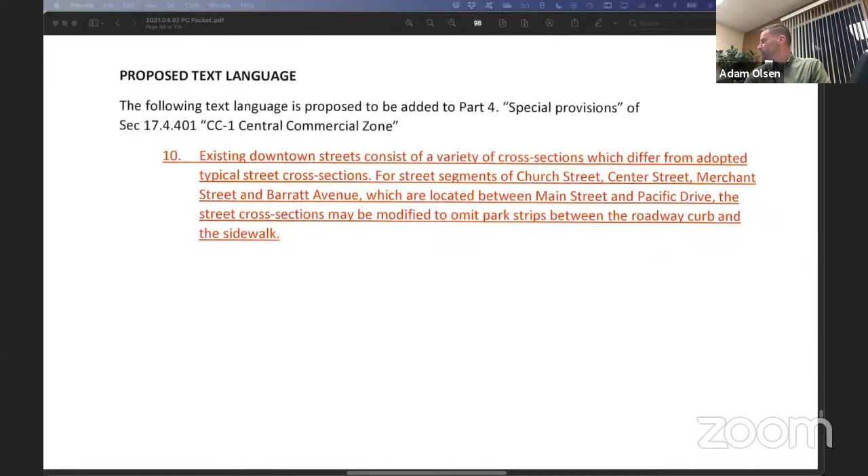Okay. Have we had any public comments on this one for public hearing? No. All right, we'll go ahead and open the public hearing. No comments. We'll close the public hearing.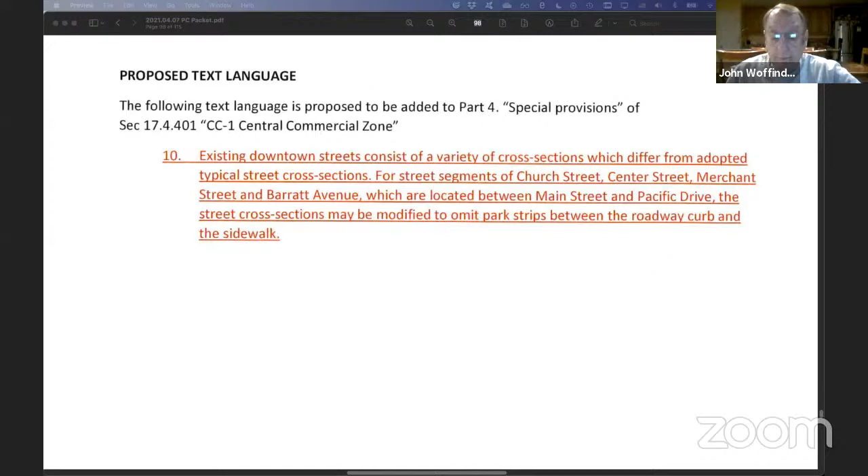Would someone like to make a motion on the item, please? This is Jeff. Mr. Chairman, I move that we recommend denial of the code text amendment. All right, I have a motion from Jeff for denial. Do I have a second on this one? Second, Harold. Second by Harold. All right, thank you. Any further discussion on this item?

If not, we'll take a vote. Christine? You were muted, Christine. Sorry. Aye. Ryan? Aye. Harold? Aye. Jeff? Aye. Chairman votes aye also. The motion is denied.

All right, moving on to number 9. Hearing, review, and action on a zone map amendment located at 1155 East, 300 North, from the RA1 Residential Agricultural to the R1 9000 Residential Zone.

Adam, lead us in this one, please. Yes, thank you. This, as you stated, is about 1155 East, 300 North. Just to the east of this property, there is a partially, or 3/4 or more, built cul-de-sac that has been subdivided. The property owner wishes to finish out that subdivision on this west side. It would require finishing out the cul-de-sac on the north and then a portion of the road. But in order to do so, the underlying zone would need to be changed, and they're asking for the R19 to be consistent with what's existing to the east and north. It does meet the underlying land use plan of low density residential, and planning staff would recommend approval.

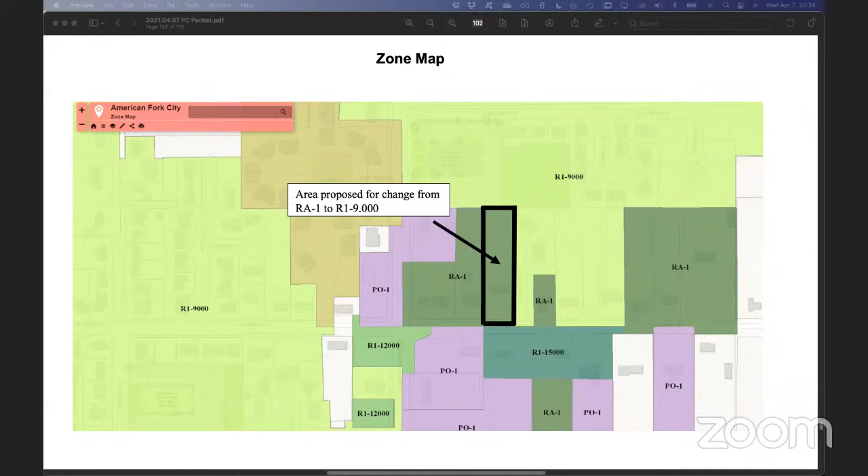All right, thank you. Any questions or concerns for planning from the commission? Engineering, any concerns on this one? No concerns, but I did email out our engineering report that got left out inadvertently. Basically just stating that additional right-of-way would be required along 300 North. That's classified as a collector roadway. Any other issues or questions for engineering from the commissioners?

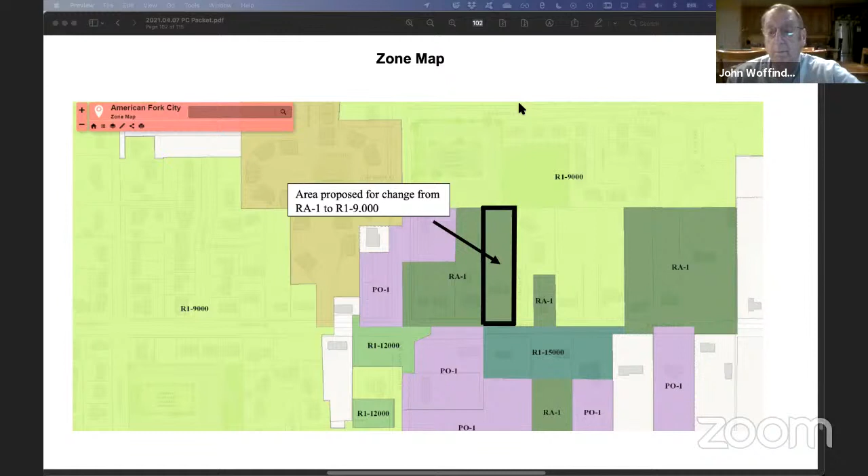This one also requires a hearing. Any public comments on this one, Adam? No. All right, we'll open the public hearing. No comments. We'll close the public hearing.

Chair, can I ask a question of engineering again? I just wanted to make sure I understood. Will you restate your comment about access on 300? So 300 North is classified as a collector roadway. As part of the zone change, additional right-of-way would be required, but it'd be required at time of development for the subdivision. So it would be a secondary as opposed to what's already there? No, it's just that additional right of way would be needed. Okay, I'm sorry, I was misunderstanding that. I appreciate that, thank you.

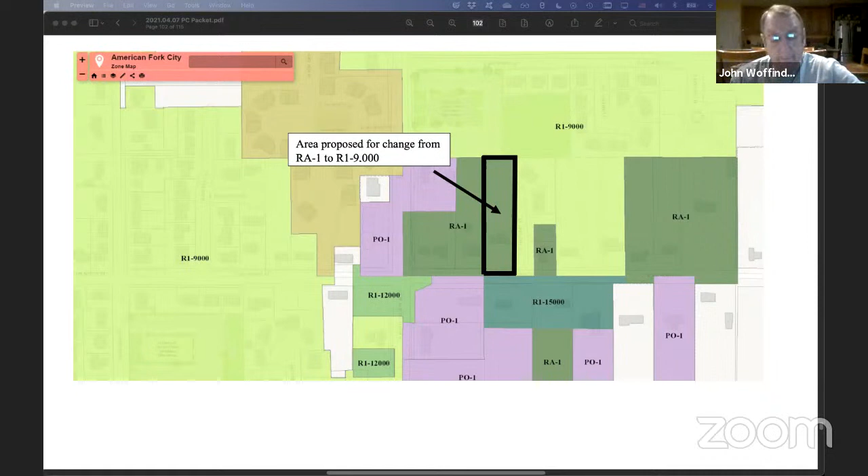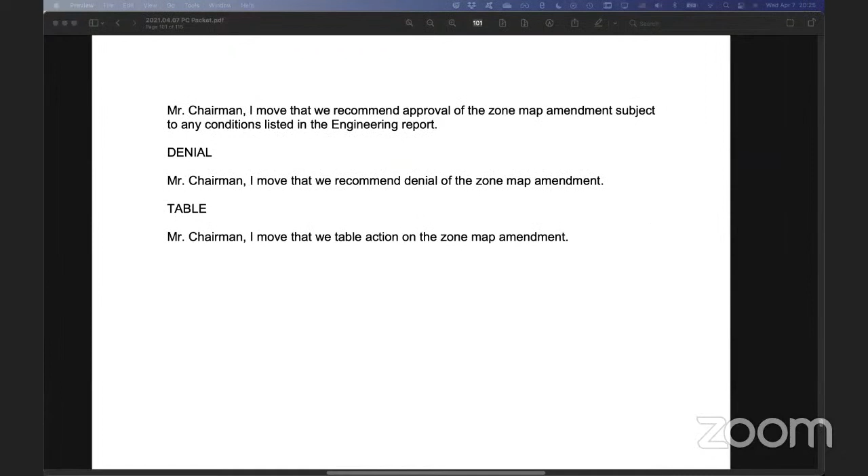All right, any other questions or concerns for this project? If not, we need a motion on this one too, please, from someone. Mr. Chair, this is Ryan. I move that we recommend approval of the zone map amendment subject to any conditions listed in the engineering report. I have a motion from Ryan. Do I have a second? I'll second. Second from Christine. Any further comments or concerns? If not, we'll take a vote. Christine, aye. Ryan, aye. Harold, aye. Jeff, aye. Chairman votes aye also. It passes 5-0. Thank you.

All right, we're down to number 10. Now this is a discussion item only. It has to do with the Northampton House. We've had them before us several times before. This one is, like I say, discussion only. There'll be no votes taken, no motions made. It's just to feel out the latest agenda he has for the project area.

Adam, would you lead us in this discussion? Start us out, please. Yes, I will. Thank you for addressing that this has been before you as a discussion item before. I believe this is the fourth time you've seen it. I do want to make you aware, for those watching, we have received a number of comments on this from area residents and neighbors, overwhelmingly opposed to the idea, as they have been before. But because it's not a public hearing, I won't be reading all of those into the record individually as I would if it were a public hearing. But I do want to make everyone aware that we have received a number of comments on this. I have sent all of those to you over the last couple days as we have received them, so they will be part of the record. But again, it's not a public hearing.

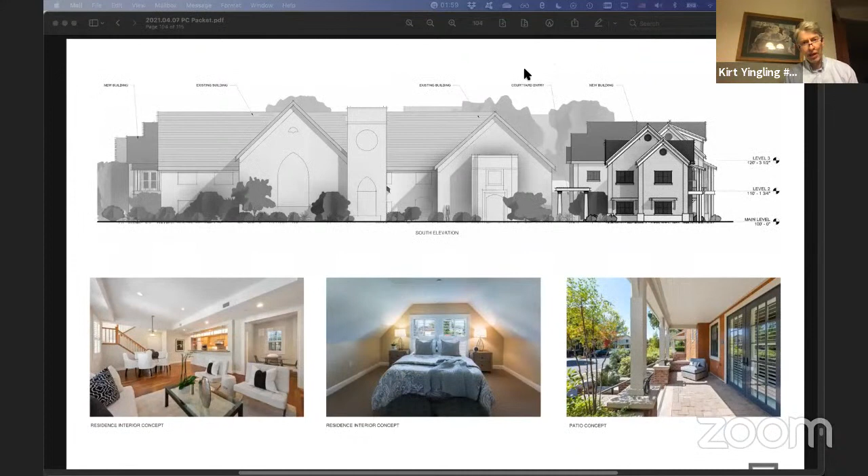We can create a beautiful garden, you can see it there. We've gone rounds with the architect over and over again to make sure we're putting in features from the old building, trying to bring out that neo-Gothic and Victorian look. It's really quite in-depth and beautiful the way it is.

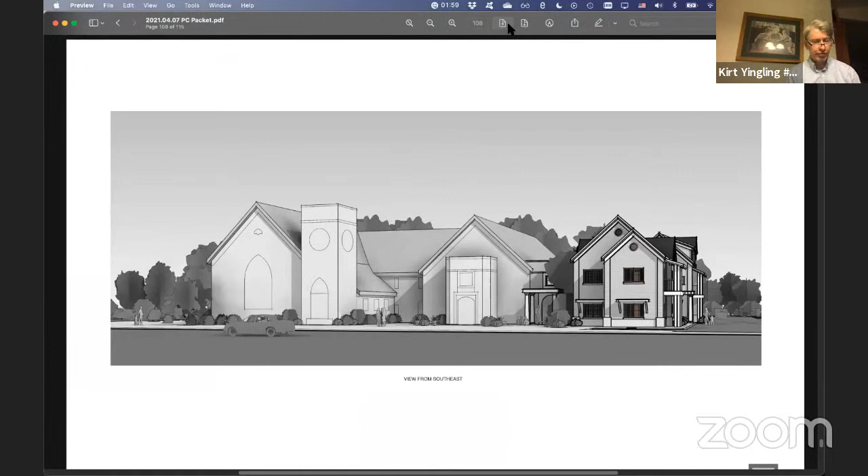We feel like, and we've seen this in the numbers, that we need to have this development to basically make the other cost effective. There's basically two options on this that you've heard before. We can do the development without the building, or we can do a development with the building. Now, without the building, we don't have any other alternatives but the underlying zone.

But we're at a point in our lives personally where we're going to make a decision here, probably by the end of the year. And once we shut the doors, if we continue to get negative feedback on this—we're trying to make this something that is wonderful, that would really complement.

We have articles, research showing from Salt Lake. University of Utah has done studies to show that this type of housing, in fact even less valued housing, raises the property value. So many of these issues—we've dealt with traffic, we've gone through that—we've gone through many of these issues on the list that we've been able to get a hold of, satisfied, we believe, in terms of the development's impact on the community, on the neighborhood.

We feel like the only remaining item then is the density issue, which calculates out to be between 14 and 15. So it's actually a small master plan with one of the phases being the old building, the other phase being the new units. The new units is 18, which is 50% of what we proposed last time. We feel like it can't be below that and still have the same nature and the same economic value that would enable the development of the old building.

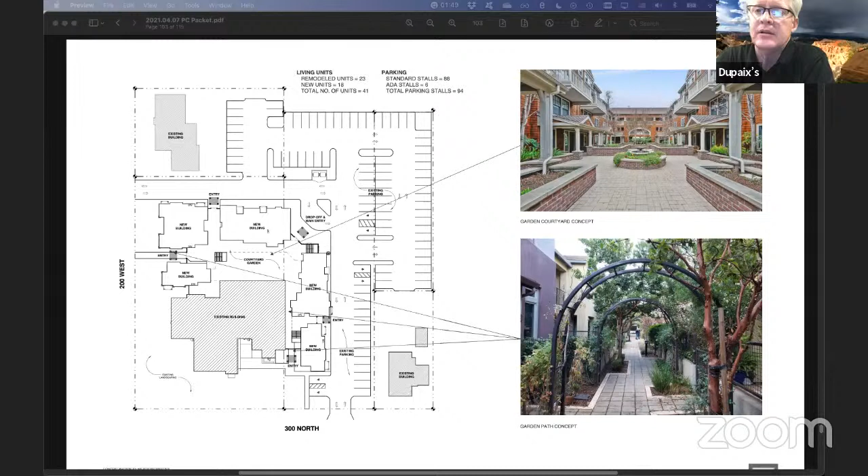I agree, that's why we have them. They're the planning staff for the city. We work hand in hand with them to make the best decisions we can for the city, and that means it has to meet the code. What about the rest of you, Ryan, Harold, whatever.

This is Ryan. I would concur with Jeff's comments. I think it's significantly better considering there's only 18 new units, as opposed to maybe I'm totally off, but I had in my head it was like 80 units at one point. So maybe it's been modified down. I could be totally wrong. Without an actual application, I don't know that we're necessarily in a position to talk about it, but I guess total units is 41 now.

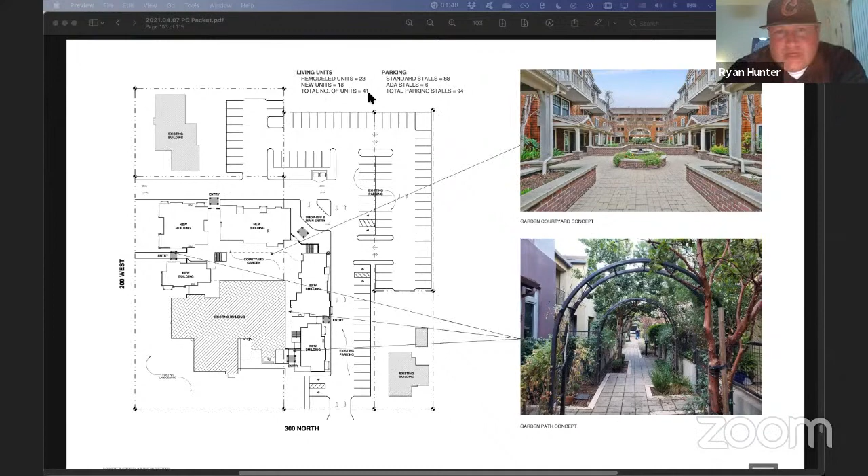But again, I think the intent of the code is to protect and preserve historic buildings, not to create loopholes. I still feel like this is, to Jeff's point, somewhat skirting it or squeezing it in. We're building a development and, hey, let's use this historic building as a way to get there. That's how it's perceived by me. So that's all I have to say.

Well, it says right in the code that it cannot be detrimental to the surrounding area, which is residential.

So Ryan, thank you. Jeff, thank you. What about the other commissioners? Christine, Harold, what do you think before we shut it down and move on? Well, this is Harold. Go ahead.

I think this is an improvement over what we've seen before, and I've spoken several times regarding this. I think at this point I would rather just state and kind of restate what others have said, that a formal application needs to take place, and then we can really dig in our sleeves and comment, have public comment. I think it's gotten to the point that I would rather just hold my comments till an actual formal application was made. I agree 100%.

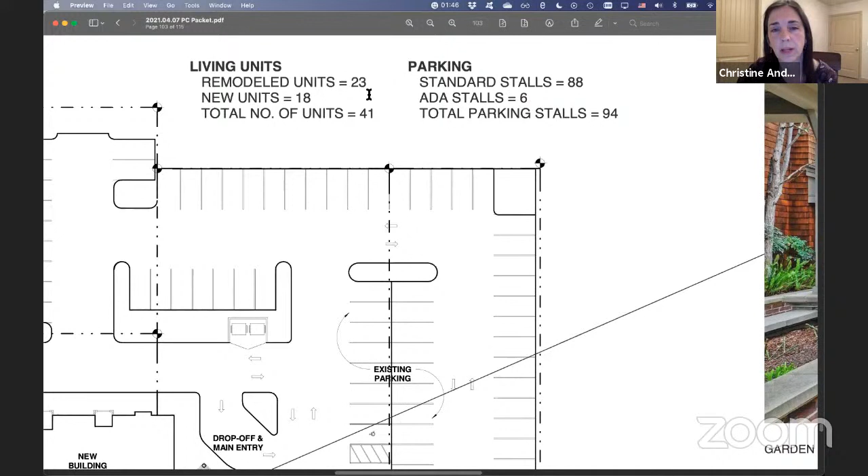I do feel like you're doing it because you love the building, and we all do. And I think that you're going in the right direction. There's been a lot of adjustments to, like Ryan said, lower the number of units, and the look is going along with the architecture of the building. But in order to get to be able to really talk about details, it would be great to see a formal submittal, and then we can hash it out.

I do have one other thing I wanted to say, possibly to all the people who are listening. And I've read twice all of the comments. I appreciate all of the comments and your willingness to engage in your community and speak up. So thank you for watching. Thank you for emailing in.

Aside from the acceptability of this exact proposal, which we aren't able to make a decision on tonight, and we won't be approving tonight, I wanted to just offer a couple of ideas about how we view housing options around us, because when we live in a neighborhood that offers benefits of a great community and good schools, we know that's something that not all neighborhoods offer.

And I hope that we aren't opposed ever to sharing a neighborhood with anyone outside of our economic status. So, you have to think, who would these people be who would move into our neighborhood if we had duplexes or apartments? It would be our grown children who are starting a family and want to live close to us, or it would be our aging parents who want to downsize and want to live close to us. And I just hope that we wouldn't ever claim that anything other than a single family housing setup would make an environment that is not favorable to family life or good community.

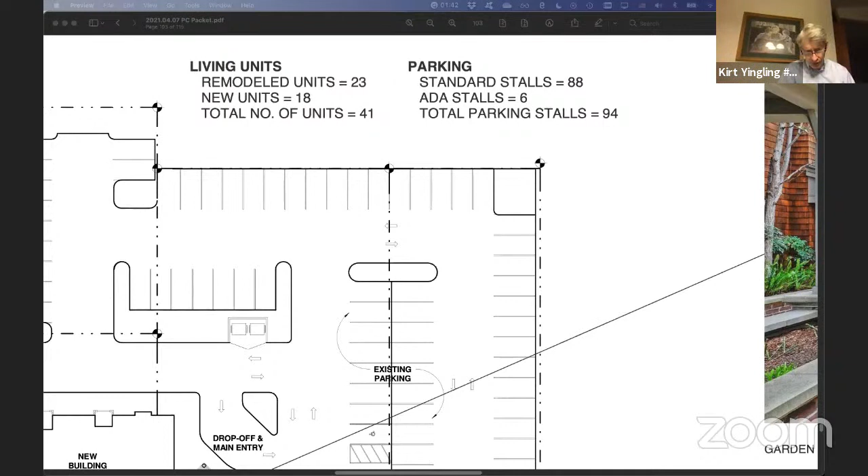I thank you very much for your input on that, and we'll move forward with that application. We look forward to seeing your application when it comes across the desk again next time around. Thank you very much, everyone.

Moving on to other business. Adam, do you have any other business we need to discuss? I will keep you informed on the status of when we will be meeting in person. I know the council is trying to do that at their meeting next week. We're going to see how that works, what kinks there might be to work out, and then move forward from there. If we don't meet in person at the next meeting, for sure we would likely do it in May, but we're just going to see how it works with the council, and the chairman and I will work together on how that may best be accomplished.

So that's all I have. We'll let the rest of you know as soon as we find out from the mayor and the city administrator and whoever else we have to answer to. There will be a special city council meeting on April 29th to replace Barbara Christiansen.

Her funeral is tomorrow at the church there on 300 North and about 4th East. I believe it's Friday, and the city had posted a little statement on that, with a link to participate or watch the funeral through Zoom. I must be mistaken, I thought it was tomorrow, but it makes more sense it'd be Friday. So those of you might want to check in on Zoom to show our respects to Barbara. She was a class lady, no doubt about it.

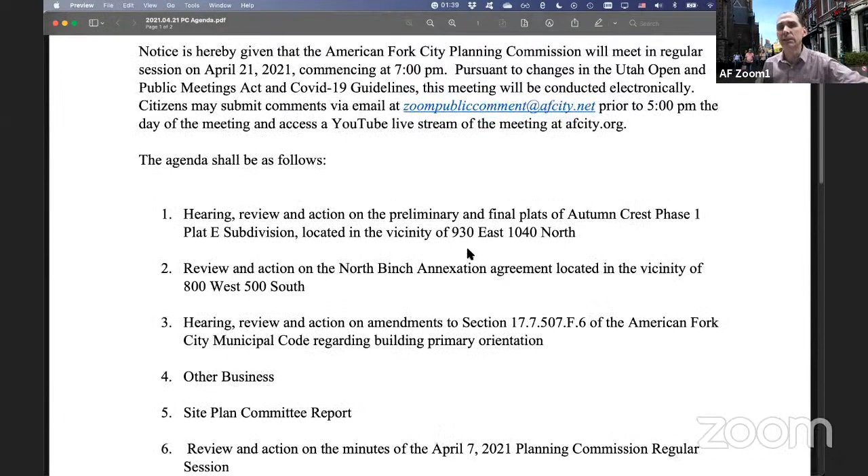Site plan committee report. Yingling, what do we have coming down the pike now? You've already heard about one item, the Lake City Row master plan again. Otherwise we have these items lined up: a final plat for the Autumn Crest Plat E subdivision, which is pretty close to finishing that area out, an annexation agreement in the southern portion of the TOD area, a code text amendment, and in addition the Lake City Row master plan amendment. That should be everything. Not quite as long a meeting as tonight, hopefully.

Moving right along, review and action on the minutes of the April 7th, 2021 Planning Commission regular session. Do I have a motion on the minutes, please? Mr. Chair, this is Jeff, I move to approve. Motion from Jeff, do I have a second? Second from Christine. Any further comments? Hearing none. Christine, aye. Ryan, aye. Harold, aye. Jeff, aye. Chairman votes aye also. Passes 5-0.

All right, we're down to the big one. Does someone want to make a motion for adjournment? Move to adjourn, this is Ryan. Ryan, adjourn, a motion. Second please. Second from Christine. All those in favor say aye. Aye. Any opposed? All right, we are adjourned.